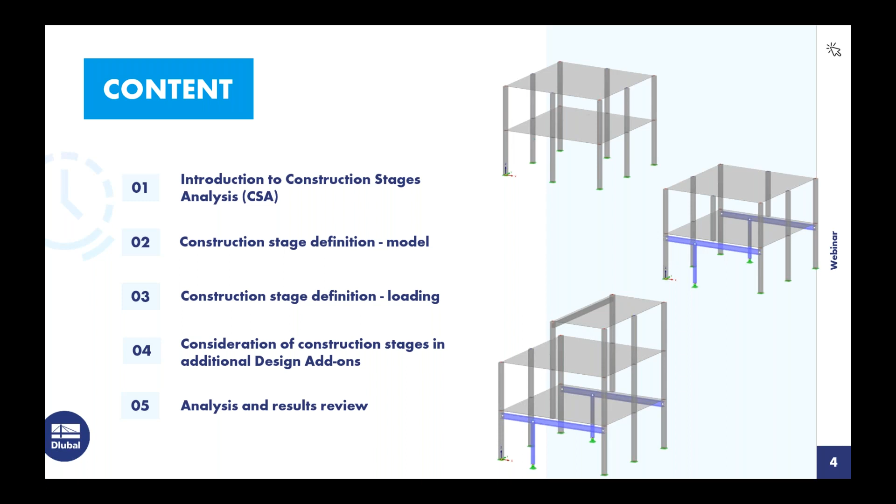So we might be wondering, why would we want to consider stage construction? Well, we know during the construction process that the structure may actually pass through several loading conditions that vary from the completed structure. So for example, when we're talking about multi-level story buildings and adding each additional level on top of each other, the previous level is already undergoing deflections and stresses.

For example, if we look at the building over on the right-hand side, we set up our formwork for the first level, we let the concrete cure, we remove the formwork and we move on to the second level. That first level is already undergoing some of these deflection stresses from self-weight alone, or maybe some of those additional construction loads. So we'd like to take those into account with stage construction.

Now, regular simple structures may see very little difference when we compare the stage construction to simply applying the loads to the finished structure. However, when we're talking about multi-story buildings or structures with vertical irregularities, such as interrupted columns or walls, we might actually see a significant result difference between the finished structure versus taking into account each continuous stage. The construction stage analysis add-on within RFEM allows us to compare similar structures under different modeling or loading scenarios in a single file.

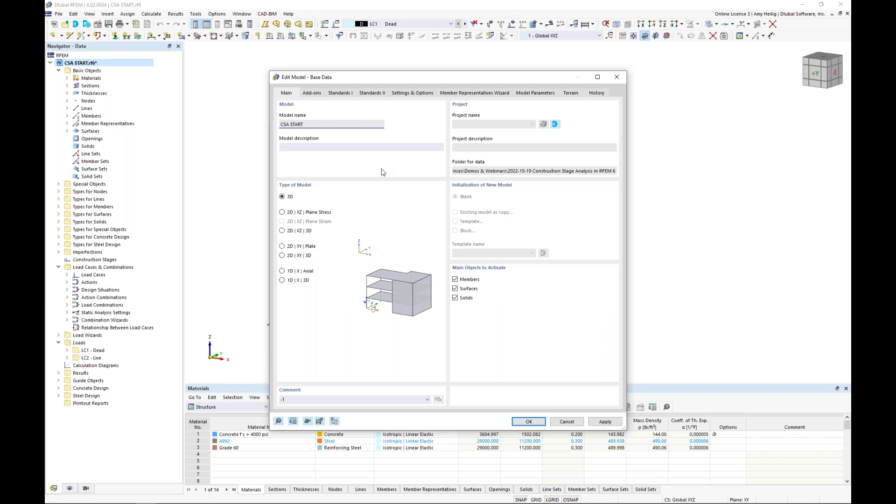Under the second tab, this is where we have all of these optional add-ons, which allow you to purchase add-ons specific to your materials and design for your particular projects. For today, we're working with the construction stages analysis add-on, along with the concrete and steel design add-ons shown here on the right.

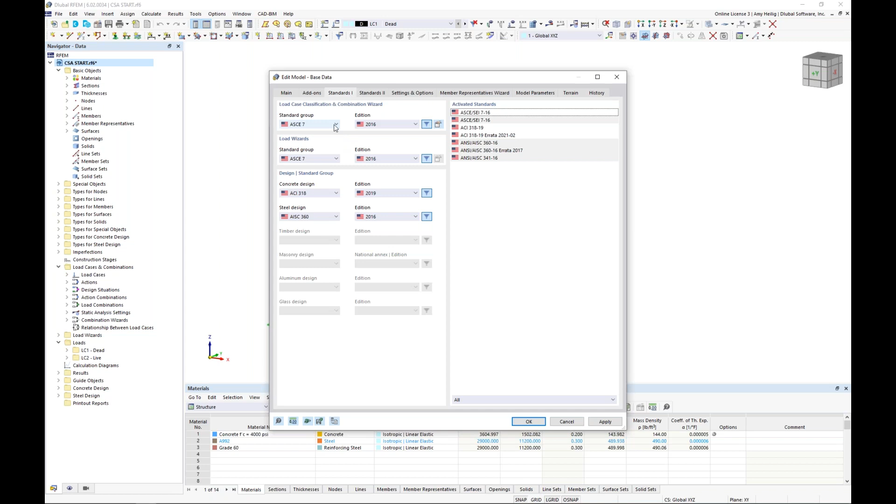Under the third tab, this is where we set our standards. We want to generate the load combinations according to ASCE 7, available in this dropdown. We also see the NBC standard, Eurocode, and many other international standards. For concrete design we'll use ACI 318, and for steel design the AISC 360. Using this dropdown, we can also see the CSA standards and other international standards available.

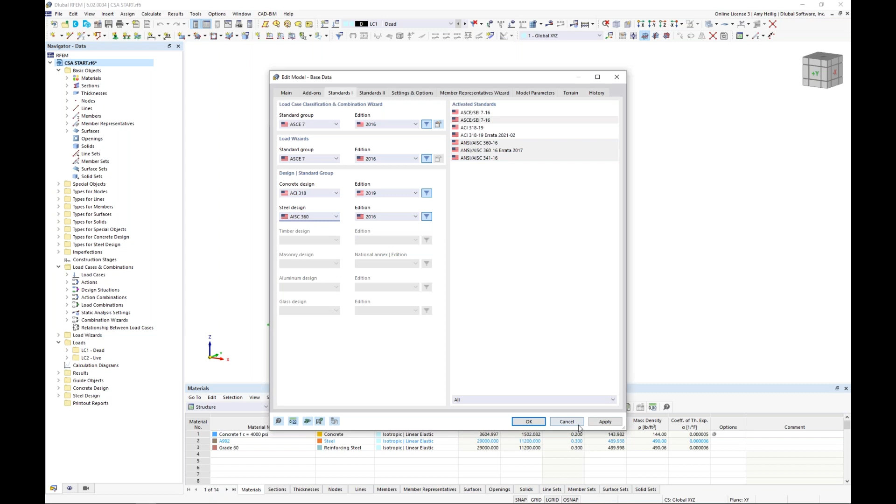Once we've verified this information under the base data, we'll go back to review some elements that have already been modeled. Looking at the navigator, we see that all of our elements are utilizing 4,000 PSI concrete.

Looking at our cross section, all of my columns, if I double click on one of them, are utilizing an 11-inch by 11-inch square section. Under the second tab, the concrete material here is set to 4,000 PSI.

Back under the main tab, notice that design properties is checked on. This simply means we not only want to use this member for analysis within RFEM, but also do the design using the concrete design add-on we turned on within our base data. This gives us all the available tabs to define our reinforcement, which will be used later in the strength and serviceability design.

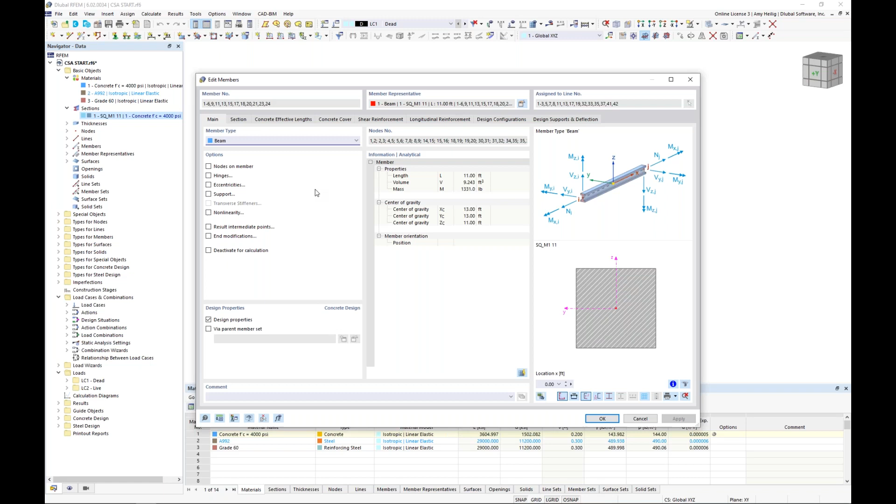I'm not going to go into too much detail today—there's an additional webinar devoted entirely to concrete design according to the ACI available on our website and YouTube channel. Just to quickly cover this, we'll see here that we can specify the concrete cover.

For the shear reinforcement, I have defined number 3s here at 12 inches on center. And I also have my longitudinal reinforcement, which is 12 number 6s spaced evenly around our cross section.

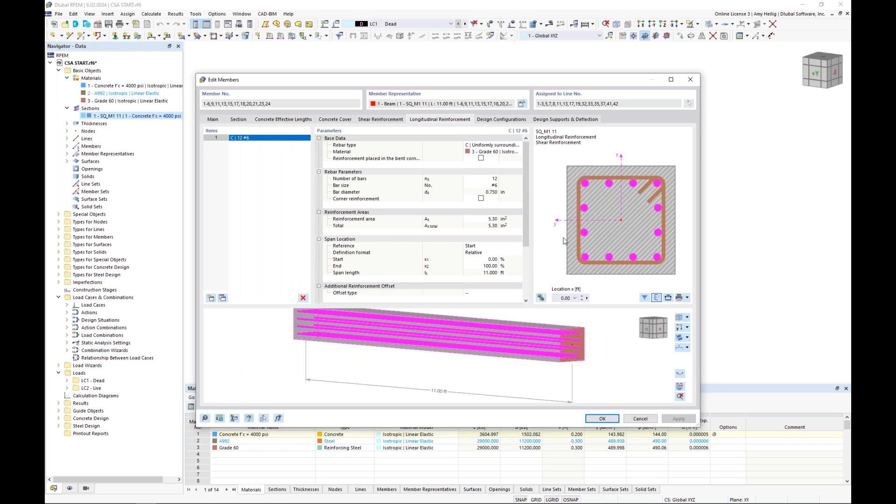This is a very similar workflow for my surfaces as well. Each of these surfaces was defined with a thickness of 12 inches. If I double click on one of these surfaces, we see that thickness defined here, 12 inches, with the 4,000 PSI concrete.

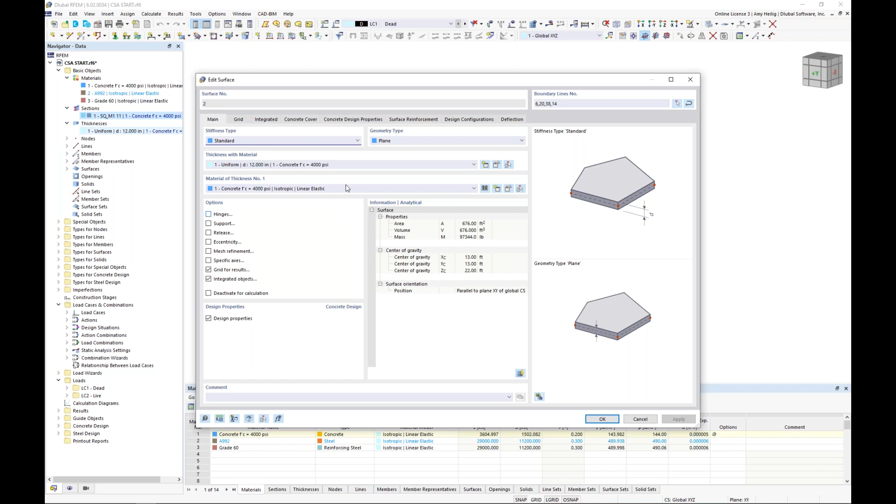Again, I've activated this design property, so we're not only using it for the analysis, but we also want to define our reinforcement for this slab to do the design later on within the concrete design add-on. We see the concrete cover defined, as well as the surface reinforcement.

Looking at this surface reinforcement, we can go into the details here. I've specified simply number 6s at 6 inches on center in both directions for both the top and the bottom—a very simple application for this concrete slab.

But I also have all of these additional free rectangular reinforcements defined. This allows me to place some additional reinforcement—number 6s again at 6 inches—where these concrete columns are framing into this slab. So rather than applying to the entire surface, we apply to what we call this free rectangular location.

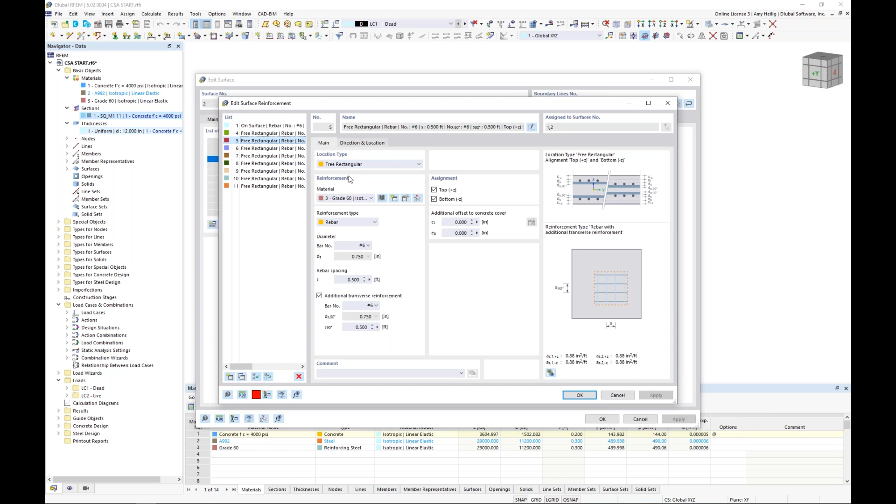Once we've defined all of our reinforcement, what's actually turned on by default—if we go to our Views tab within our navigator, under the Types for Concrete Design—and maybe switch this into wireframe view, we can actually see the reinforcement displayed graphically.

We see our shear and longitudinal reinforcement for our concrete columns. And for those slab elements, we have our number 6s at 6 inches on center, but we also have some additional reinforcement where those columns are framing into the slab.

So we can always turn off this display just to get a little bit of a cleaner look here.

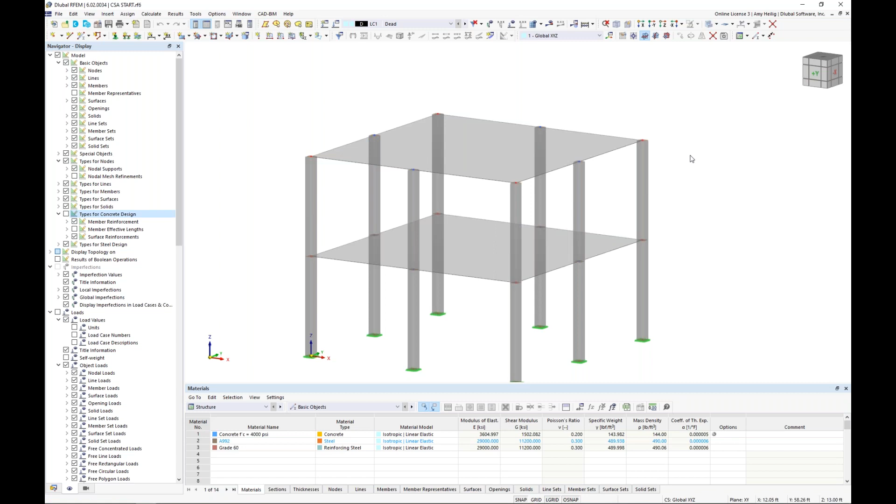Additionally, what else I have hidden, which I'll turn on now, is the mesh refinements. I've added these FE mesh refinements, visible by these symbols at the tops of each of the columns. Within the program, we're likely going to get what we call singularities, where these single line member elements frame into the slab elements at a single FE mesh point.

So I'd like to refine the FE mesh here, which you can see I've gone ahead and done with a nodal mesh refinement.

Additionally, what I have defined, which we'll find under the result objects, is what we call surface result adjustments. Now we can see all of those displayed at the tops of our columns. If I double click on one of these, we have the ability to average out the internal forces over a set area, which helps smooth out those singularity areas.

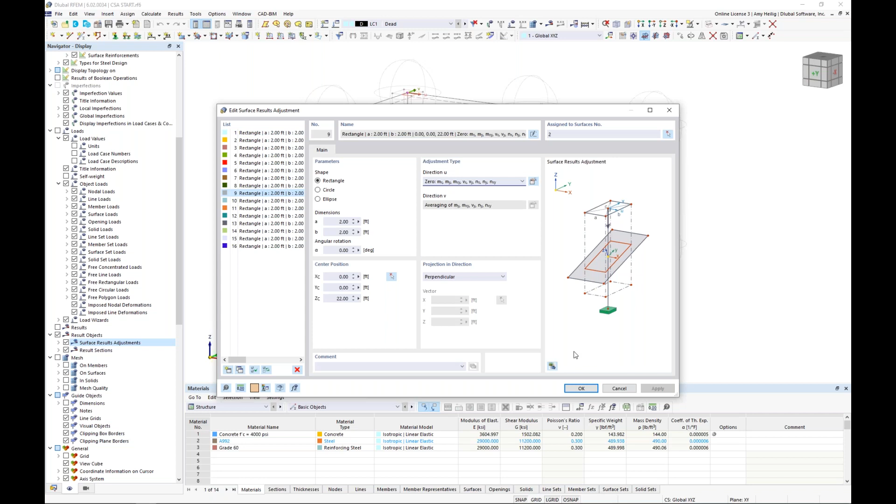For my simple example today, I actually just zeroed out those internal forces at those locations. They're not really a concern for our simple example, so I set that as the definition type here for these surface result adjustments. Again, all of this is just to help with those singularity issues.

So we'll go ahead and turn those off. These will come into play a little bit later on, but for now we will turn this back into the rendered view. So this is my starting structure, just simple two-level concrete elements.

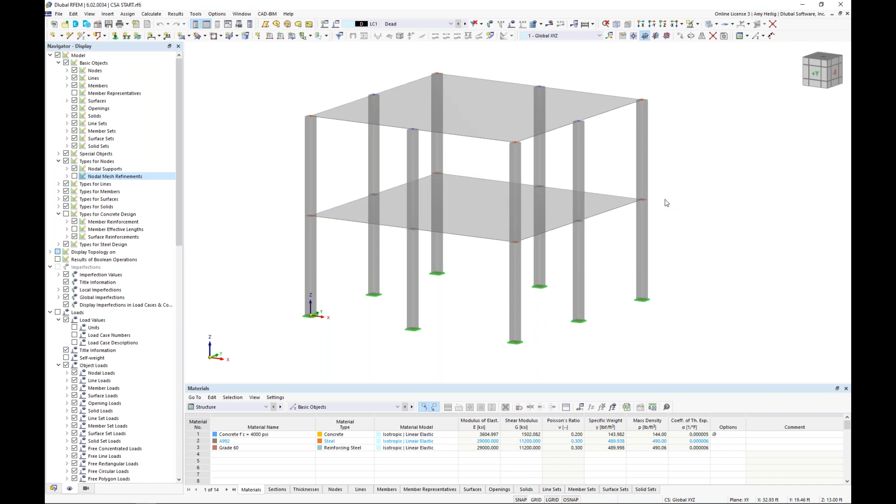Ultimately what I'd like to do is remove these center two columns here on the first floor. Instead of these center two columns of the existing structure, I'm going to add in some steel beams that span between these exterior columns underneath the slab, as well as an additional couple of steel columns that are slightly offset from the center of the structure.

So we're going to deactivate these columns and instead add in some steel members, which will just describe the workflow here of our staged analysis. Before we define any of these construction stages, we need to ensure that we have everything completely modeled in RFEM. So we will begin by drawing a new member here, and up in my quick toolbar, I can draw a new single member.

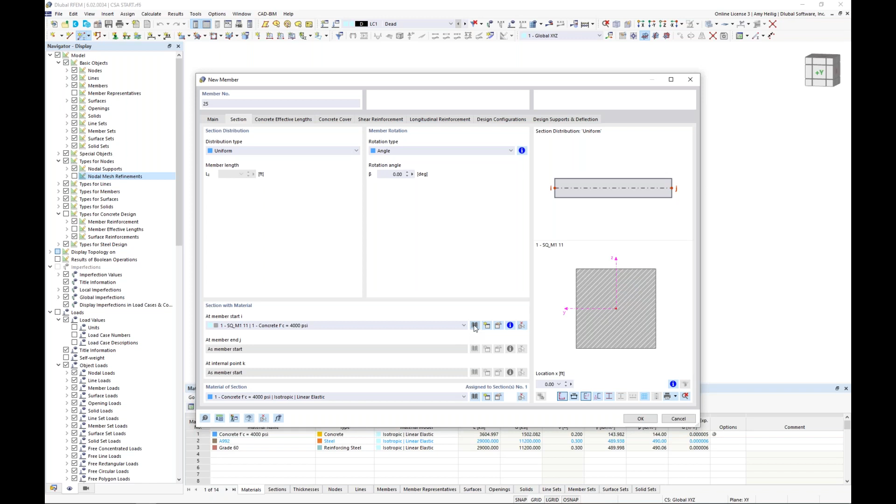Now, under the section tab, I want to define a new cross-section by visiting my cross-section library, and we can see all of the various sections available to us, including the parametric sections, where we just simply input the dimensions and the cross-section properties are calculated automatically.

Alternatively, we can view these standardized sections. For example, we can activate our I-beams. We can use our filters on the left to filter to the United States and to the AISC 15, and I want my beam section to be a W14 by 82. So I scroll down here to my list, and I select the 14 by 82.

Of course we don't want this to be a concrete material, so what we'd want to do is activate our material library for this particular section. Once we launch the material library, we can use our filters on the left to filter to the material type steel, then set the standard to AISC 360, and we'll see here steel A992.

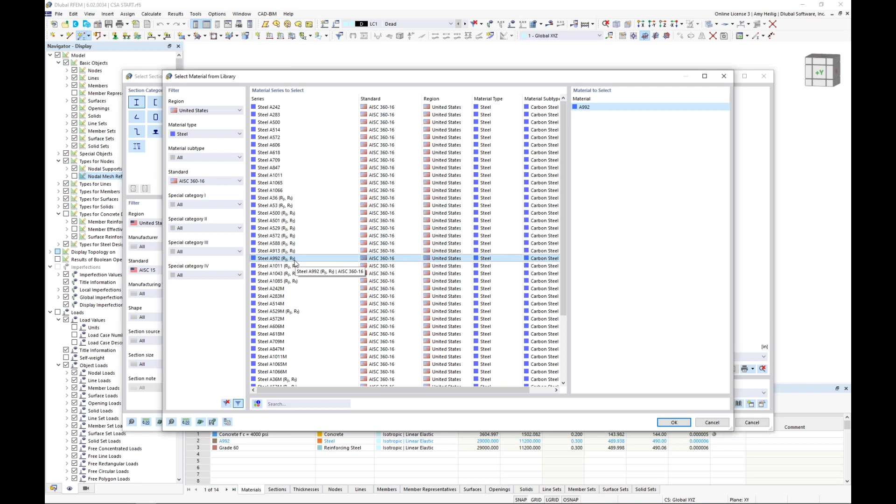Now for me, I already have this steel material defined within this model, so rather than redefining a new material every time, I can just select it here within my dropdown. I select material number 2, A992, and our beam has now been defined here with the correct cross-section as well as the material properties.

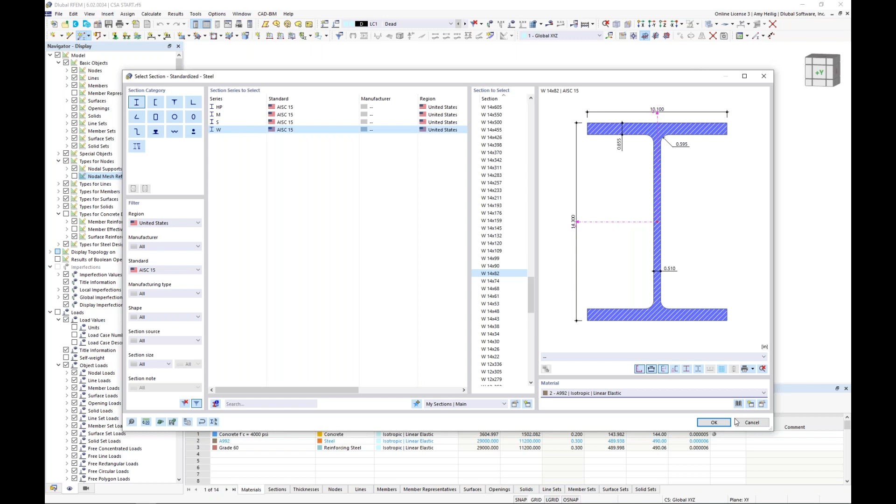In addition to defining the cross-section and material, notice that the design properties is turned on here as well, but we're no longer referencing the concrete design add-on that we activated under the base data—we're now referencing the steel design add-on. Before I draw these members, I also want to activate here a couple other options, including hinges and eccentricities.

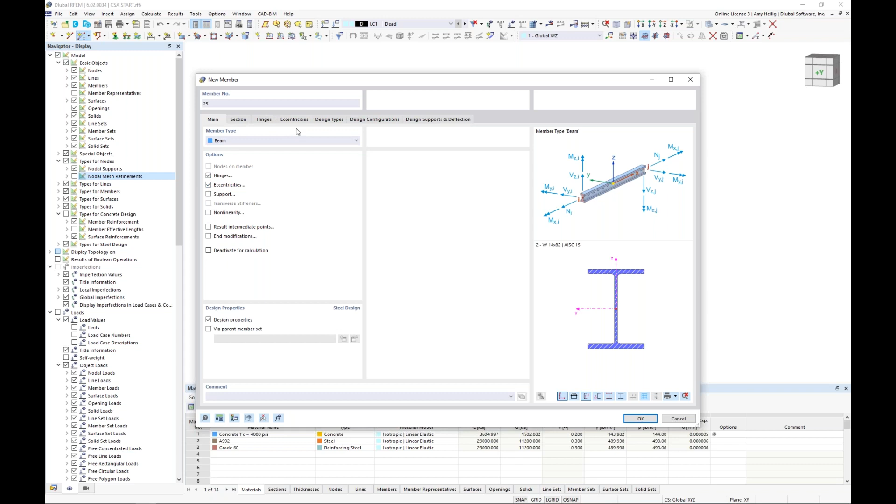Notice we have two additional tabs here up at the top. Remember that everything within RFEM is considered fully fixed, so if we want to release a moment, for example at the ends of the member, we need to define a new member hinge. We do so by activating the hinges.

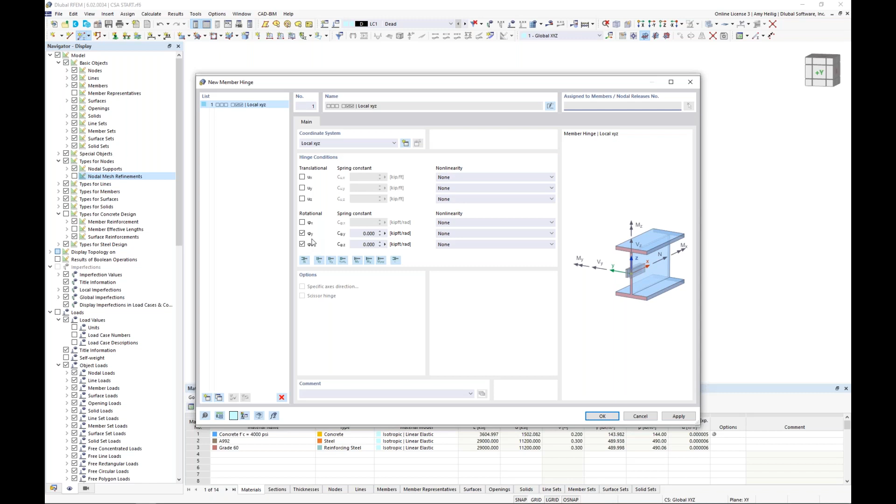We create this new definition type, and the program automatically assumes that I'd like to release the moments based on the local Y and local Z axes of the member. So this is a member end moment release. I click OK, and I've applied that to the member start. Rather than redefining for the member end, I can simply select it here from my dropdown. So we'll go ahead and release the moment at either end of this particular section.

Now the eccentricities is a very similar workflow. We want to define a new member eccentricity here, and I'm going to use this option within my dropdown relative to section.

I will tell the program to take the topmost point of my cross section, and I actually want to offset it from an additional object that already exists within my model. I'm going to select here the option surface, and then I can graphically select surface number 1.

I want to drop this beam member down below the bottommost point here of this surface. So the whole advantage of using this option relative to section is that if I make any changes to my cross section size, or any changes to the thickness of my surface, this eccentricity will automatically update. I don't have to come back in here and adjust it manually.

So we applied that eccentricity definition to the member start. We also want to apply it to the member end.

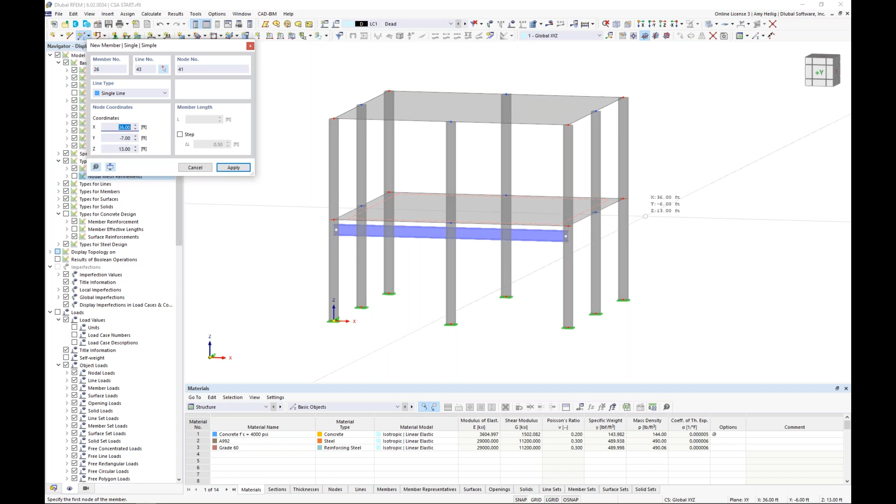Now that we have defined the hinges and eccentricities, I click OK, and then I will snap from the right-hand column to the left-hand column at the front of the structure, and also do the same at the back of the structure. So now we can see this steel beam drop down below the surface.

Obviously, it's intersecting these concrete columns, but that's completely fine. We'll make these changes later on with the construction stages so that both of these do not exist together.

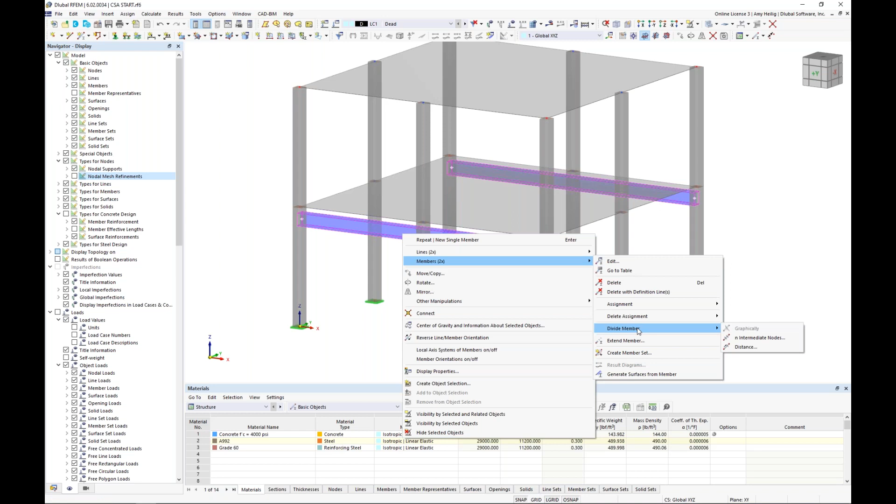I'm going to hold down my control key and select both of these members. I want to right click here, and under the member option, I'm going to divide the member by a set distance. So here is where I want to add a node along the member 8 feet from the member end.

But instead of actually dividing the member, I'm going to turn on this checkbox here to create the node along the length of the member without dividing it.

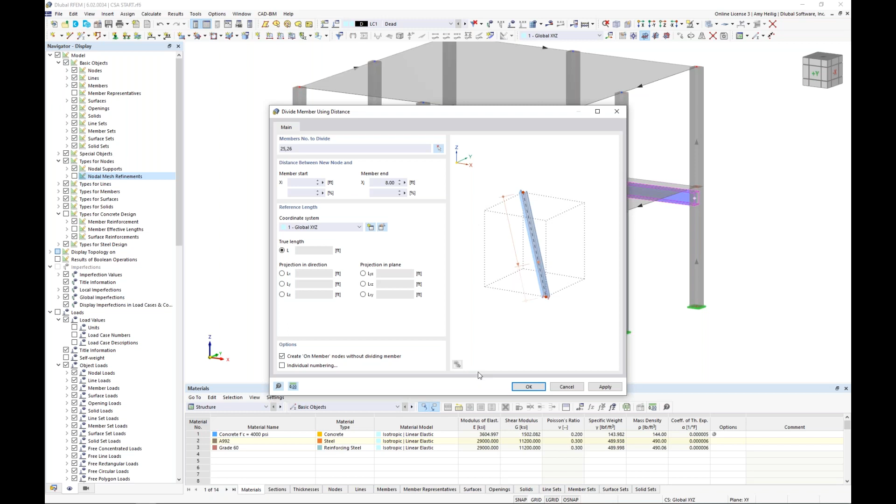So when I click OK and we turn this into wireframe view, you'll see that this is still one continuous member, but we now have a couple of nodes here defined along the member length.

And these nodes are special in the sense that they're of the type on member, and the program automatically detects which member it should be integrated with.

So what this allows me to do now is to draw in my steel columns that will frame into these steel beams. So I'll begin here by just adjusting my drawing work grid, and we can turn this on at the bottom of the page here, and we will also adjust the plane.

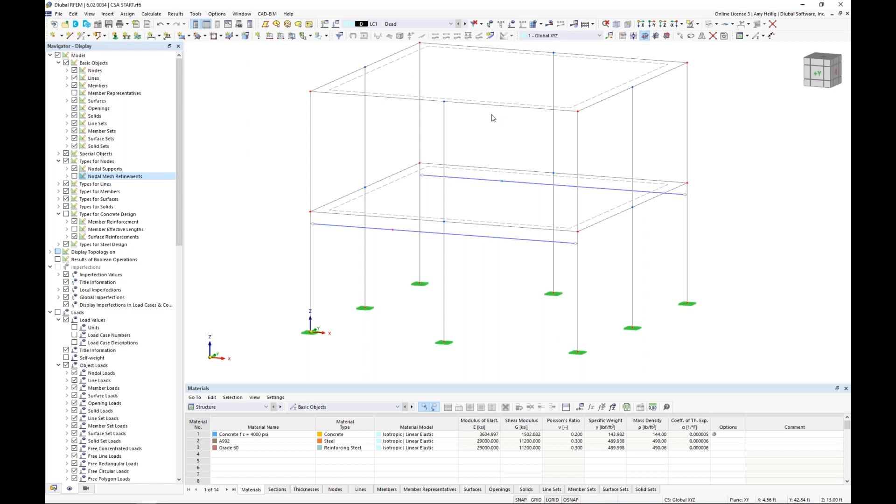And I will create a new cross section yet again. So the member type is set to beam.

The section here will be defined once again from my section library. In these standardized sections, I want to select here a W8 by 35. Remember, I already have my A992 material defined within the model, so I can select that here.

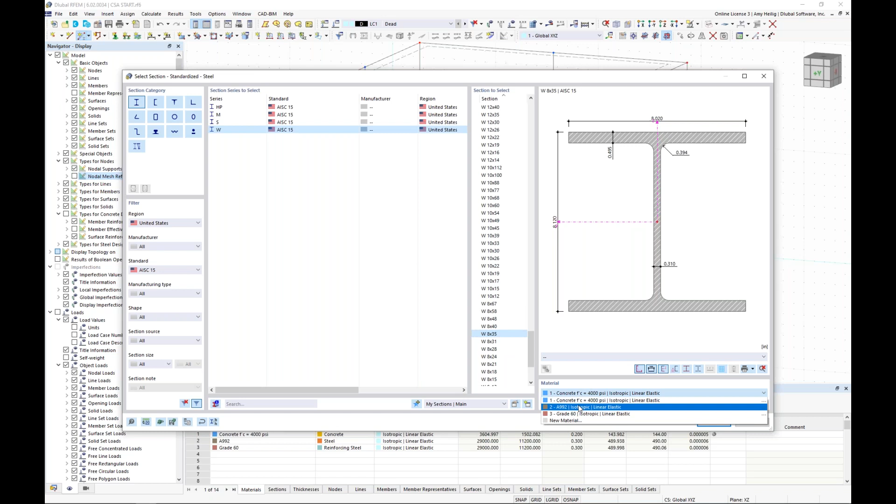I click OK. And the one thing that we'd like to add here is also a hinge definition. So under my hinge tabs, remember I have already defined that moment release, so I can select it here from my dropdown as well, where I can release the moment at the member end.

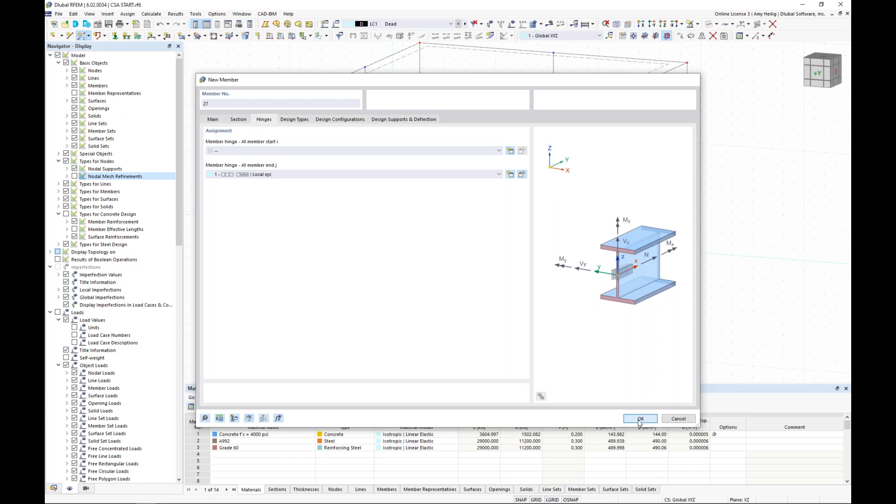I click OK, and then I'm going to snap from the bottom of the structure up to that node that was created. I can right click to exit this dialog box.

If we take this element, we can highlight it, hold down our control key, and we can drag and drop to the rear of the structure to create that additional column.

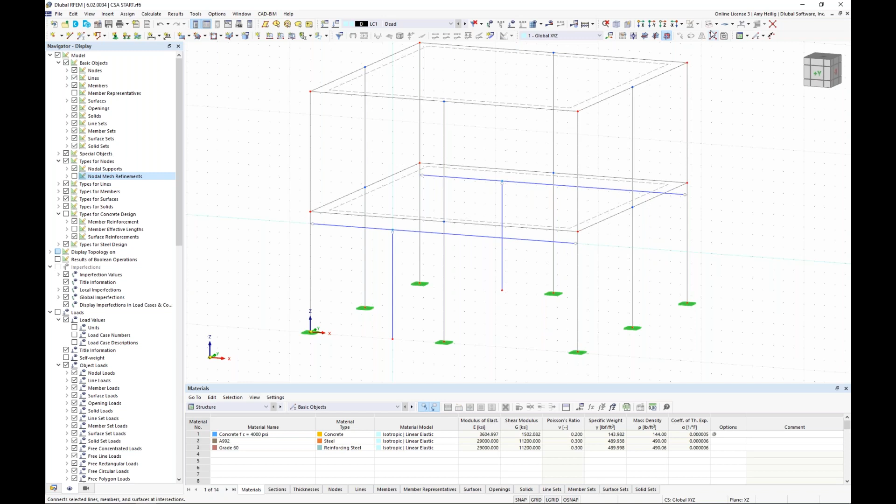So now that these two columns have been generated, there's a few additional things that we want to take into consideration. Number one is we obviously need to add some supports to the bottom here.

So we'll go ahead and add in a new nodal support. We're just going to use one of the default definition types here, hinged. I can click at the bottom of these steel columns to add in that nodal support.

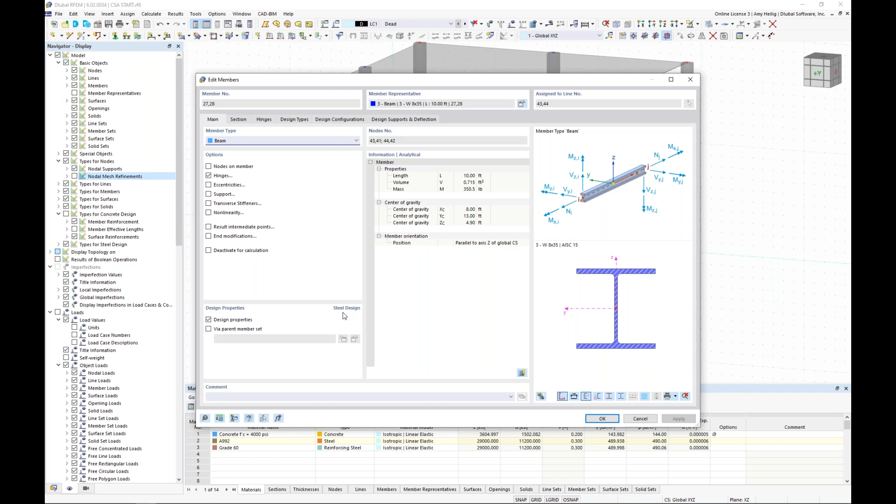The second topic is holding down my control key to select both of these columns. Remember, we are going to design these members utilizing the Steel Design add-on at the end of this example. But one thing that is required if we want to do so is we do need to define information like the unbraced lengths. We do so here under the design types effective lengths.

Now, again, I have an additional webinar devoted entirely to steel design according to the AISC that goes into much more detail to talk about the unbraced lengths or effective lengths definition type here.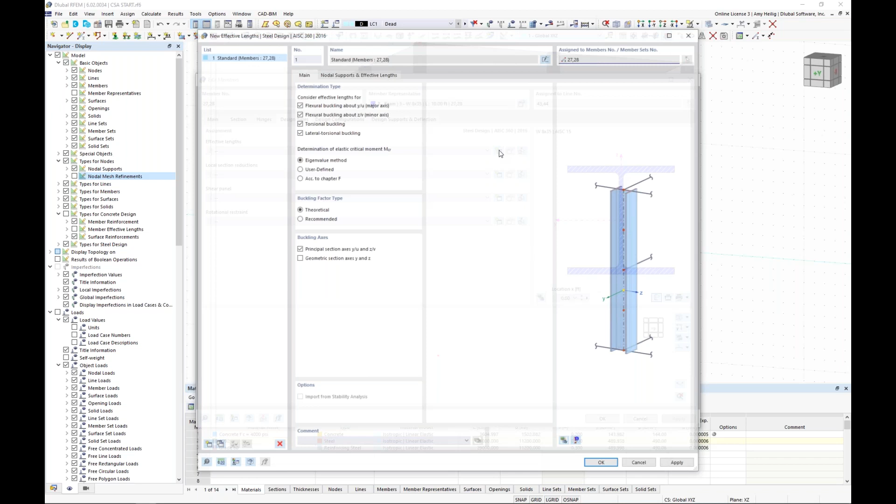So we'll just quickly add in these intermediate supports that are going to be applied here for flexural buckling, torsional buckling, and lateral torsional buckling. Under this second tab, the default option is to add in this intermediate support at the member start and member end.

And now my unbraced lengths for my stability design will default to the full member length. So when I click OK, we go back into the model and the unbraced lengths have now been defined here for these particular elements.

Now we need to do the exact same thing for our beam elements. We'll select both of these elements, and under the design types, we define a new effective length. But this time I want the program to detect these intermediate nodes, in particular where this steel column frames up into this steel beam, where I can add an intermediate support in the vertical direction. So now the program will consider this with the effective lengths, or unbraced lengths, for our stability design.

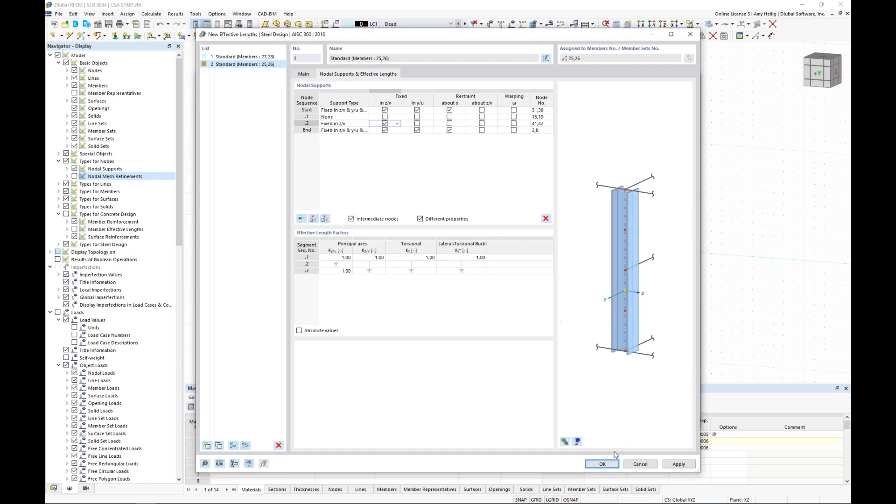Okay, so that takes care of the unbraced lengths, which will again come into play a little bit later on for our actual steel design according to the AISC.

The final topic here related to this first story is that currently this slab element is entirely connected to this steel beam, so full moment transmission between these two elements.

Now, if we'd like to release some of those degrees of freedom, we can consider what we call a new line hinge. Under the option types for lines, we expand this folder and see a line hinge, where we can right click to create a new definition type.

With this line hinge, I'm going to release all degrees of freedom: three in translation based on the local X, Y, and Z axes, and one in rotation. Keep in mind these are based on the local axes of the line element itself, not the local axes of the surface or the member. Each line has its own X, Y, and Z axes.

But rather than keeping these fully released, we want to add a nonlinearity. This nonlinearity will allow the slab to bear down on the beam when we have downward deflection. So if we have a negative shear value in the local Z direction, we should see full fixity, but if we have uplift, then that relationship between the slab and the beam will be released. So we're applying this nonlinear behavior to the line hinge.

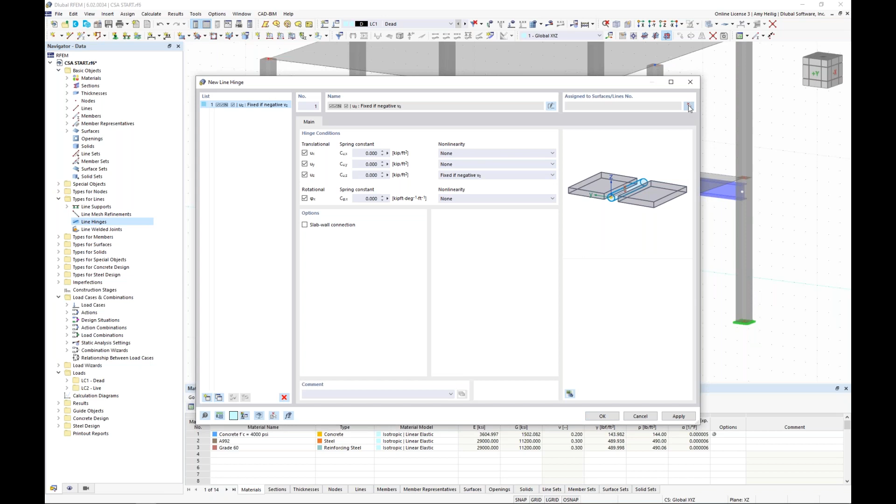Once we have the definition type presented here, we want to apply it to the model. We do so by first selecting the surface we want to apply the line hinge to, then selecting the lines, where we select the front line number 12 concurrently with the back line number 18. We click OK, click OK, zoom in, and we see a very small symbol for that line hinge definition.

Again, this will also come into play with our construction stages. So we're now complete with this first story.

The final thing I want to do with this model is add in a third story, a partial third story. Before we do that, I'm going to go back to the nodal mesh refinements and turn back on my concrete reinforcement and also those surface result adjustments. I'm doing so because when they're graphically displayed, this will ensure that when I copy all of these elements to the third story, all of these details are also copied.

So we can go ahead and highlight this top story, including the reinforcements, mesh refinements, and so on. Normally we could use this simple drag and drop copy that I showed you with my steel columns, but I want to take advantage here of the Move Copy tool for a specific reason.

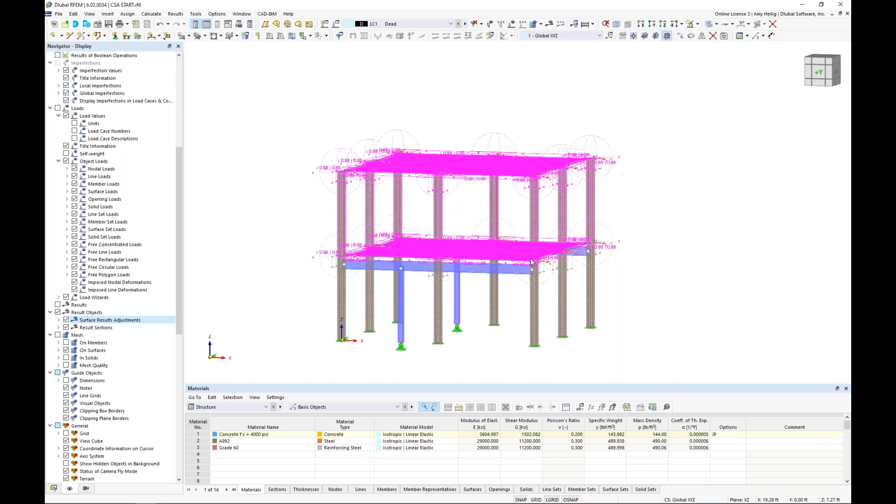So we're going to create a copy of that second story, and I can either type in my displacement vector or use this measurement tool. I can snap to the bottom of that second story up to the top, and we see the program automatically detects this is 11 feet in the Z direction. Under the numbering and options, I have the ability to not only copy all of the elements, but also the loading. I have some existing loading on the structure for dead load and live load, which we'll visit in just a few minutes.

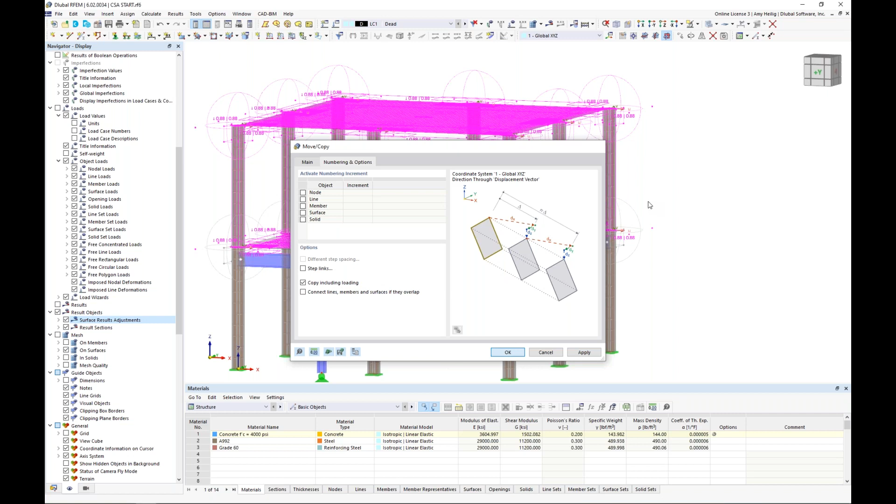By activating this checkbox, all of those loads will also be copied. So I click OK, and what we should see here is the addition of this third story.

Now for this third story, I actually want it to only be a partial third story. So we'll need to clean this up slightly. I can do so by holding down my control key to select the tops of these nodes of these columns. I hit delete on my keyboard, and now all of those columns are gone.

I'm also going to hold down my control key to select my columns as well as the nodal point here at the tops of the columns. I'm going to use my Move Copy tool again, but instead of creating a copy, we'll uncheck this. I want to use my displacement vector.

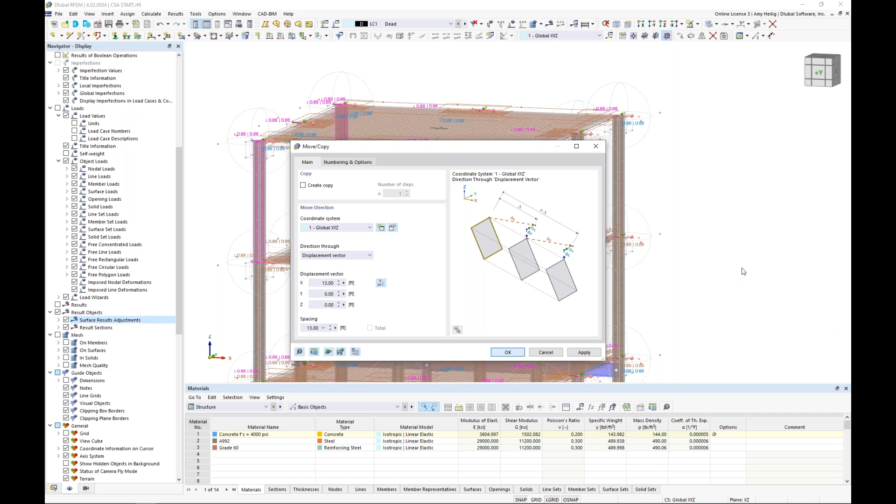I will select from the left-hand side of the structure because I want to move those columns to the center of the structure. So, a displacement vector of 13 feet. When I click OK, what we should see is that partial third story.

Notice that all of my reinforcement was copied as well, and it's somewhat adjusted since I essentially shrunk down this third story to a partial third story rather than the entire area. Back under my navigator, we can see the types for concrete design and all of my surface reinforcement listed. So the program was intelligent enough to apply the same reinforcement to that third story.

We see our number 6 bar is at 6 inches on center. We also see our free rectangular reinforcement that was defined for that third story. So we can make modifications if we're not needing such close spacing, or if we want to change our bar diameter, we can do so. But for this example, I'll leave everything as we see here.

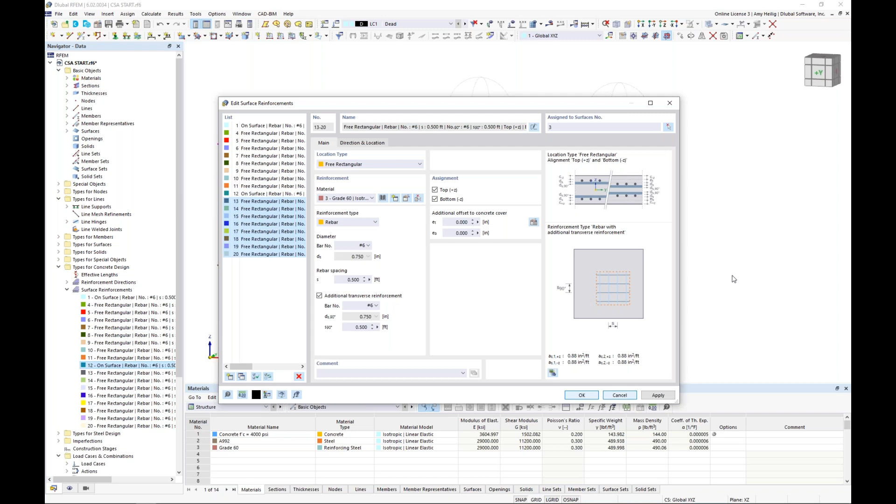So all of this information over here that exists, we can simply highlight it and hit delete on our keyboard. Essentially the modeling is now complete for this structure.

Again, before we define those construction stages, we need to ensure everything is fully modeled within RFEM itself. So I want to turn off the nodal mesh refinements. I'll turn off my reinforcement and those surface result adjustments just for a cleaner look. Now we're finally ready to begin with our construction stage definition.

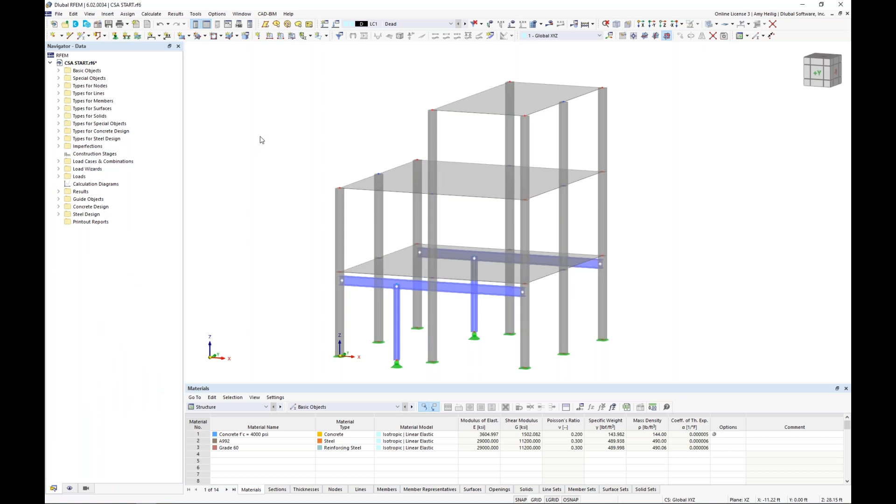Back in my navigator, we have a nice feature here. If I right click, I can collapse all of these folders. Actually, there's one more thing I wanted to do before we define our construction stages: maybe we wanted to apply a quick rib element that spans between these columns.

Just to introduce you to this rib type, we can draw in a new single member, and we can see here the member type would actually be set to rib. Now, what's special about a rib is we can integrate it with the slab, so those internal forces will now include the internal forces from the slab for some effective width that we define.

We also can turn on the design properties to design this as a T-beam, including the reinforcement in the concrete design add-on. For today, I'm not so interested in designing it, so I can simply turn this off. I only want to consider it for the analysis. Notice all my tabs here to define my reinforcement are now gone.

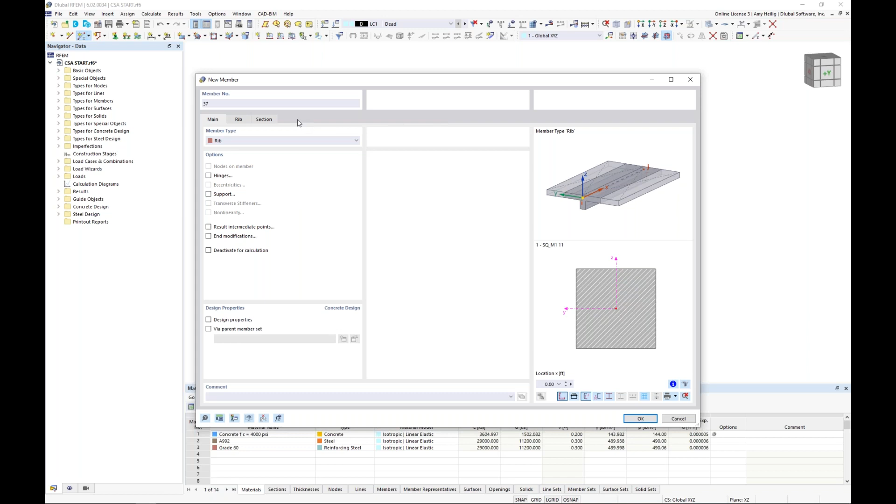So under the section, we will create a new cross-section type for the last time, and we'll choose this massive rectangular section, where I can quickly choose under the second tab my dimensions, and I will type in directly 8 by 12 inches for this rib element.

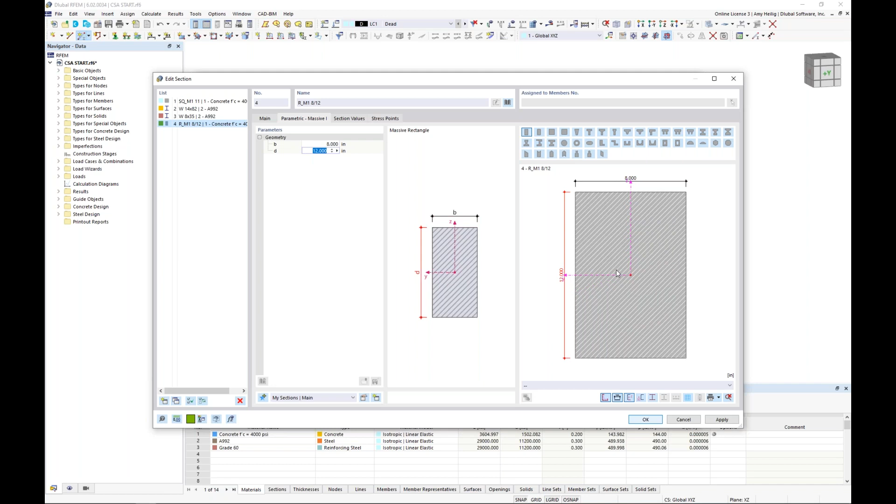4,000 PSI concrete is already defined, and under this second tab, we want to drop this down below the negative Z direction of the surface element itself. So when we click OK, we can draw in this rib element from right to left. Again, internally we are including the effective width of this element. If we revisit the rib section, we can actually see that drawn here graphically.

Okay, so now we are done with all of the modeling within the RFEM program here, so we can move on to the construction stages. We've collapsed all of these folders just to make this a little more visible. You'll see here the construction stages option. Now this is only available because we activated that construction stages analysis add-on under our base data.

We will start by right-clicking to create a new construction stage. You can see the program defaults to construction stage number 1, and gives it the name of Start. We can override that name if we'd like, but we need to tell the program which elements are active for this first stage.

We'll begin with our members, our surfaces, as well as our nodal supports, and get additional tabs up here. I did want to point out this option that's grayed out for time-dependent analysis. This is still in development. Eventually we will link the construction stages analysis to our additional add-on for time-dependent analysis to take into consideration topics like creep and shrinkage, but for now this is still in development.

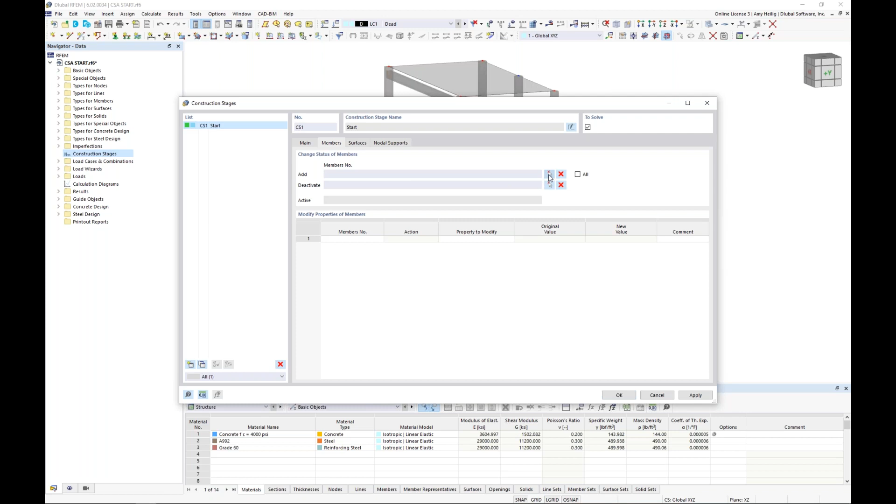Under these additional tabs, we want to add in the initial elements for that first stage, and we begin with our concrete columns. At this first level, I'm going to select all of my concrete columns, making sure I'm not selecting any of these steel elements yet. For my second floor, I select all of my concrete columns here as well. I click OK. For my surfaces, I want to activate surface number 1 and surface number 2, and I click OK. Finally, for my nodal supports, I want to activate the nodal supports at the base of these concrete columns. Again, I am not selecting the nodal supports of my steel elements, and I click OK. So my first stage definition is complete.

I'd like to create my second stage definition, and I can do so within the lower left corner, number 2. You can see here that I again have the ability to override the name, so if I'd like to rename this one, we can call this one Add Steel Members. I want to activate my members.

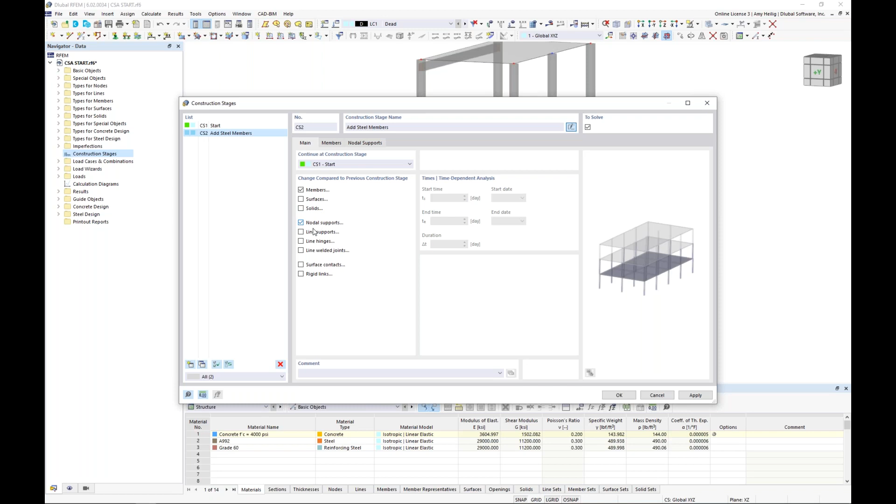I'm not actually making any changes to my surfaces, so we can leave this active, but for simplicity we can also turn it off since we're making no changes. We can go ahead and select the nodal supports, and remember we also added in those nonlinear line hinges, so we want to activate this here as well.

Now under the members, this is where we want to deactivate those center concrete columns. I select here graphically members number 9 and 13. At the same time, I'm going to activate all of my steel members, so I can graphically select all 4 of these steel members. This entire process is going to be completed here within this second construction stage.

By all means, we could have certainly separated out these options into two stages. Perhaps we'd like to deactivate our concrete columns first in one stage and then an additional stage to add in the steel beams. It all just depends on how your construction stage workflow is for your particular project, but for me, I just define these all in one stage, so that will happen simultaneously.

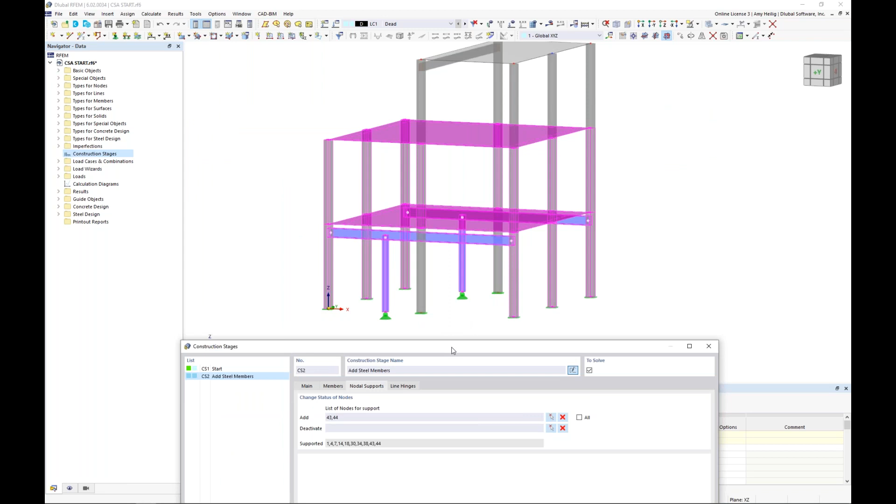Now the nodal supports, we do need to add in the pin nodal supports at the base of the steel columns, so we go ahead and select those. I don't need to worry about deactivating the supports at the bottom of the concrete columns, and in fact the program won't even let me because it says these members no longer exist, so those supports are no longer active either.

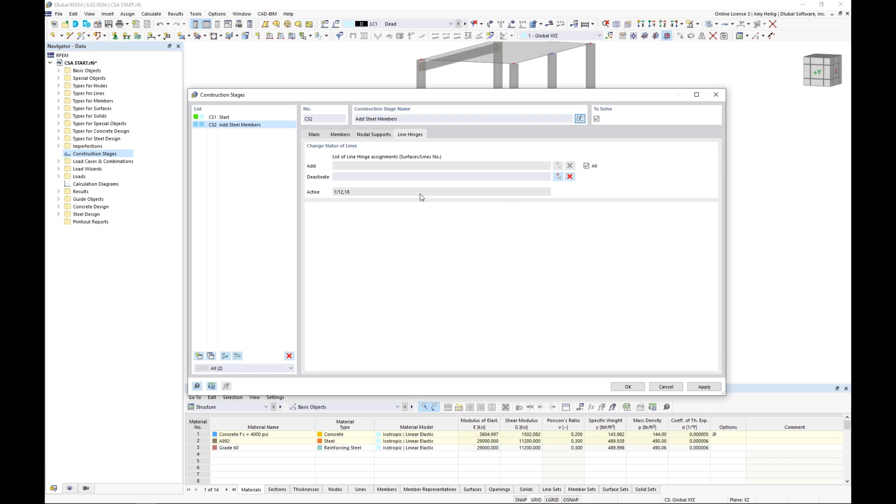Now finally we also have the line hinges, so I can graphically select the line hinges, or alternatively I can just simply hit this all checkbox. We only have one line hinge definition in the entire model, so this option all will go ahead and activate all line hinges here. This will complete our second construction stage.

Now the final stage, which we again go down here to the lower left corner, and we want to rename this one to Add Third Story. The options here to activate, we want to leave on the members. We also want to activate the surfaces, but everything else can be unchecked.

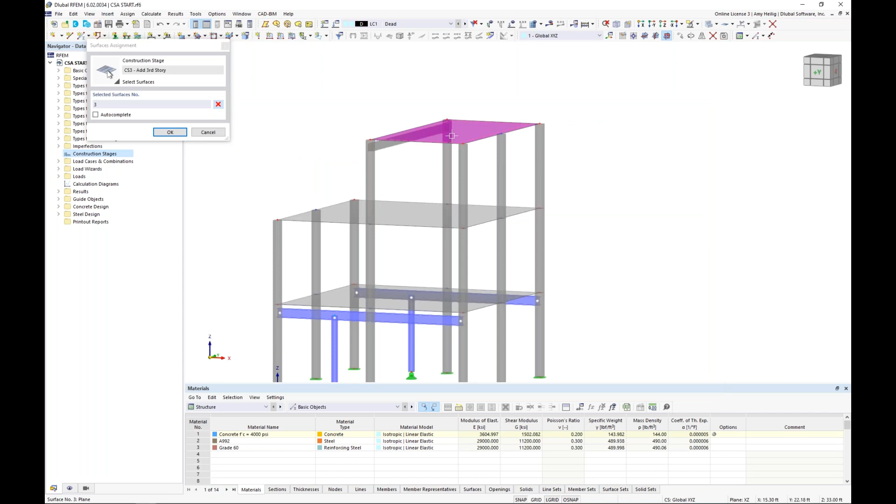For our members, we want to add in all of our concrete columns and even that rib element here at that third story. I click OK, and then my surfaces, I could either type in directly surface number 3, or I can graphically select it here. This will sum up my construction stage definitions.

Once I am done defining all 3 of these stages, I can click OK. What you'll actually see here at our drop-down is each of these construction stages presented to us where we can graphically see what's going on.

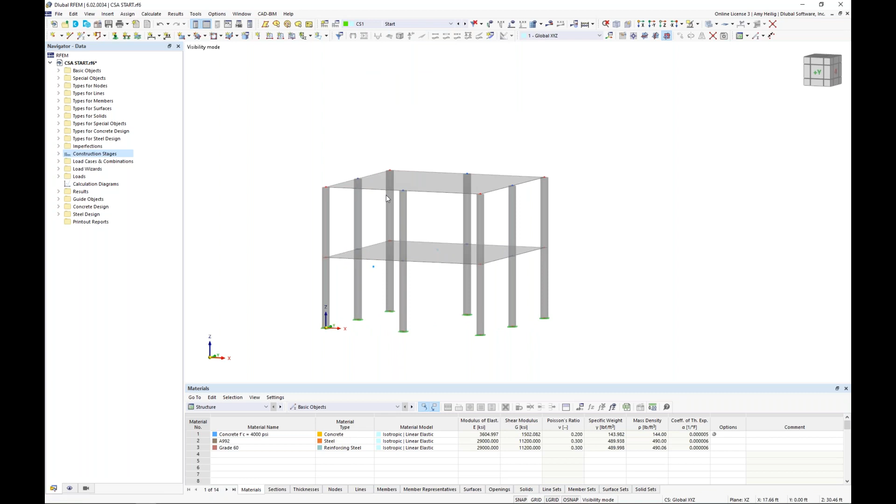So here's stage number 1. Here is stage number 2 — notice those 2 concrete columns are gone, and we've added in our steel elements. And finally, we have the addition of the third story. So this will sum up the construction stage definition from the modeling point of view.

But now we need to move on to the loading. How can we integrate the load cases as well as combinations to these various construction stages?

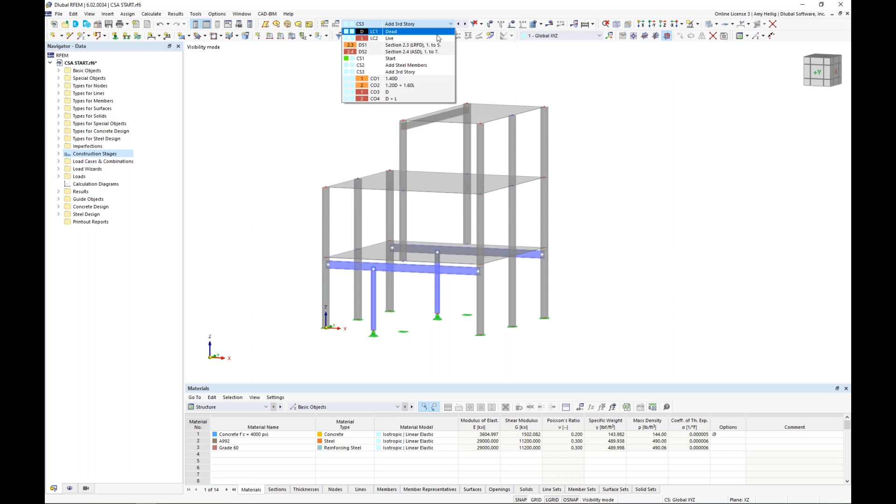I want to point out first that I have already applied 2 very simple load cases to our model today. If I activate my dead load and turn on the display, these are simple surface loads applied to all 3 levels. Remember, when we copied this third level, the loads were also copied. So just a simple 35 pounds per square foot for our dead load. Same concept for our live loads, slightly different magnitude of 40 pounds per square foot applied at each level.

Now, of course, for a project in real life, we'd probably want to add in wind loads, snow loads, whatever else it may be. But for this simple example, we only have these dead and live loads.

So I'm going to access my load cases and combinations dialog box, and we see these 2 load cases listed. Dead load, where self-weight is automatically turned on with the action category set to dead load directly from the ASCE 7. The second load case is live load, again with the action category set to live.

So if we back this up a step, remember under the base data, which we modified at the beginning of this example, I told the program I want to generate my load combinations automatically according to the ASCE 7. Of course, we can make changes here if we wanted to switch to the NBC or any other standard. But when this option is turned on to generate the load combinations automatically using the combination wizard, the program will reference the selected standard to automatically create those load combinations.

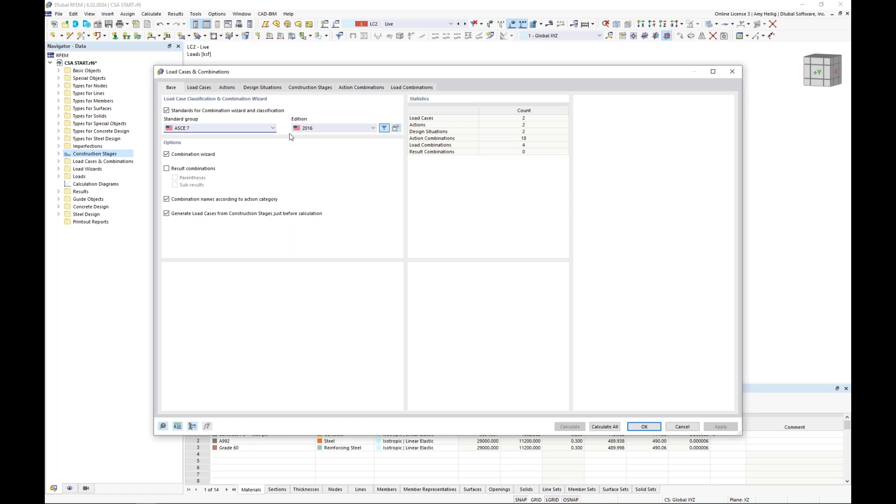So let us take a look at the design situations. The design situations are absolutely needed when we want to do design in the various add-ons. We have activated the concrete design add-on and the steel design add-on, and we'll see a little bit later on why we need these design situations.

The design situations essentially encompass all of our load combinations. We have two of them here: our LRFD design situation from the ASCE 7, which is all of our factored load combinations directly from the standard, and a second design situation for ASD, which is our unfactored load combinations. Again, we can reference here to see exactly what they look like according to the standard.

Now, if we take a look at the load combinations tab, here are my individual load combinations strictly for those dead and live loads, since I don't have any additional load cases defined. I have two factored load combinations that belong to that LRFD design situation, shown here in orange, and two unfactored load combinations that belong to my ASD design situation.

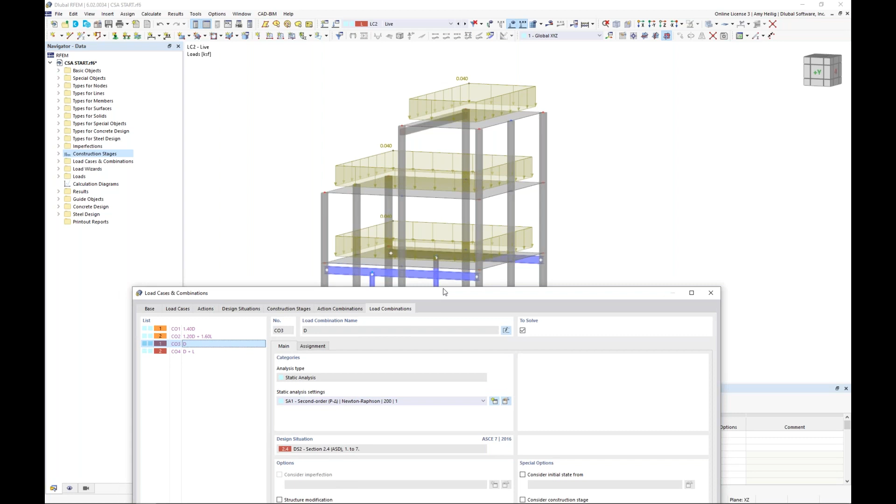Now, if I was applying the conventional method of applying all of these dead loads and live loads to my structure — again on the finished structure with the third story and the steel members — then we would just go ahead and move on with the calculation utilizing these load combinations. But currently, they are not referencing those various construction stages.

So what we want to do here is go to the Construction Stages tab. And here we see our 3 stages that we have already defined, which are automatically brought into this dialog box. Notice that each one of these stages will reference the previous stage — it says continue at construction stage number 1 for number 2, and of course our third stage is referencing number 2.

A couple other options to point out here: the construction stage analysis is done according to the load combinations. This is grayed out because it's also in development — in the future we plan to add the option for load cases and a result combination using linear superposition. This would be for linear structures where we don't necessarily have to incorporate the construction stages into each load combination, but rather we superimpose the results on the finished structure utilizing a result combination instead.

So this could be a really powerful increased performance feature for multi-level story structures. Maybe we have hundreds of load combinations, so this will essentially be very efficient. But for now, it's still in development, so that's why this option is grayed out.

Now, the static analysis setting, this is really important. You can see here that my construction stages right now are set to second order. If I go into the detail settings here, we could change this to first order, second order, or third order. We want to ensure that these static analysis settings are either equal to or higher than what we're using in our load combinations and our design situation. So my design situation is set here also to second order, which means that my load combinations will be run according to second order.

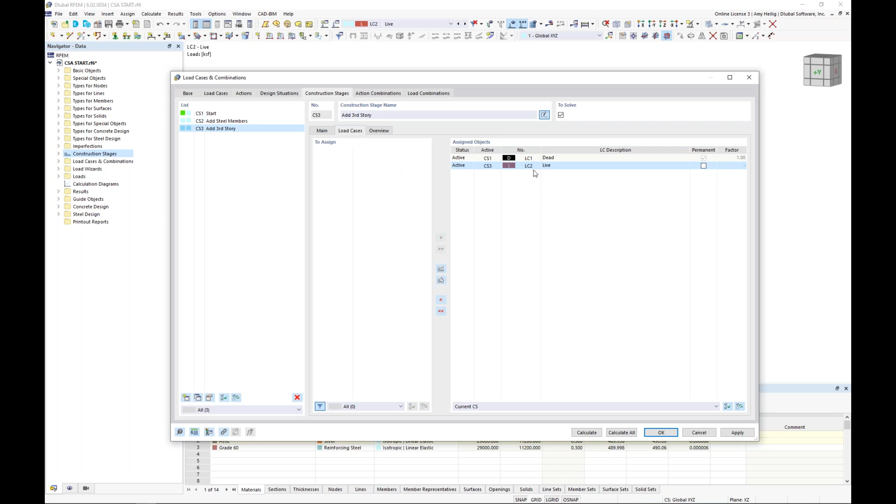And finally, we have our third construction stage where we've added in that third story, and dead load is already automatically included. It has to be because of that permanent checkbox here, but I'm going to factor back in my live load here. So now we have allocated each one of these load cases to the construction stage.

The final thing to do here is to tell the program to create the combinations utilizing the construction stages as well as the combination wizard. So I turn on this checkbox here and go into the detail settings, and I'm going to tell the program don't consider the normal load combinations that we previously saw. Rather, just consider the construction stages only. I'm not concerned with the final structure and applying those loads with the conventional method.

And I click OK. And then we can just simply turn on this checkbox here for the rest of these stages. This checkbox is already turned on if we go into the detail settings because it's part of this combination wizard definition type number 1 here.

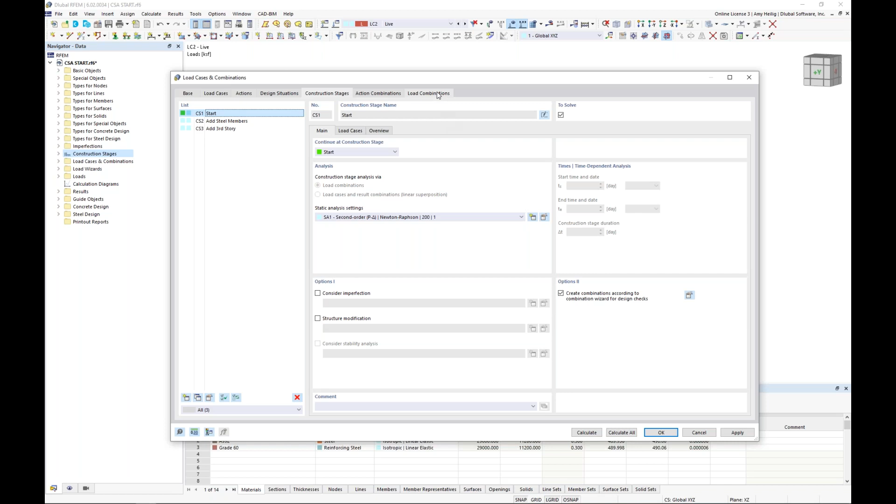So now that we have selected this checkbox, we should see slightly different load combinations shown under this last tab, and sure enough, we do. Notice that we have our factored load combinations, part of that first design situation, but they are now considering the construction stages. So for stage number 1, we have 1.4 dead load. For combination number 2, still construction stage number 1, we are now also considering the live load, so dead load plus the live load. If I look at construction stage number 2, I'm only considering the dead load, so 1.4 dead. Remember, live load I did not incorporate into this particular stage.

Notice on the right-hand side, the program says for the initial state, I'm going to consider the previous construction stage. You can see our load combination number 1, so it will take into consideration those strains and stresses that the structure is already undergoing from construction stage number 1, and apply this to construction stage number 2 for this particular load combination. Same exact concept here for construction stage number 3.

We can see the initial state is set here, but we're also factoring back in our live load, so we see 2 additional load combinations here. Same exact concept for my unfactored load combinations that are part of this second design situation here, my ASD design situation. Now we see a couple of grayed out load cases down here at the bottom, and we might be wondering what those are for.

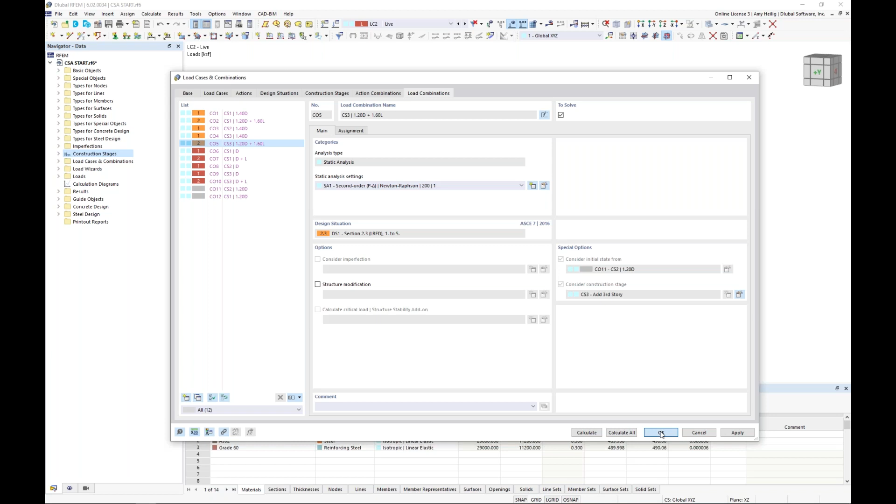Now that we are done defining the load combinations, considering the construction stages, we're finally ready to run an analysis. So before we run the analysis, what's also nice is that in my dropdown, I see all of those load combinations listed here, and I can actually cycle through them.

Here's load combination number 1 with my dead load. Here's dead plus live. Here's my second construction stage, again only with the dead load. And then I move on to the addition of that third story with the dead load consideration, and then dead plus live. So the program's automatically combining all of these together.

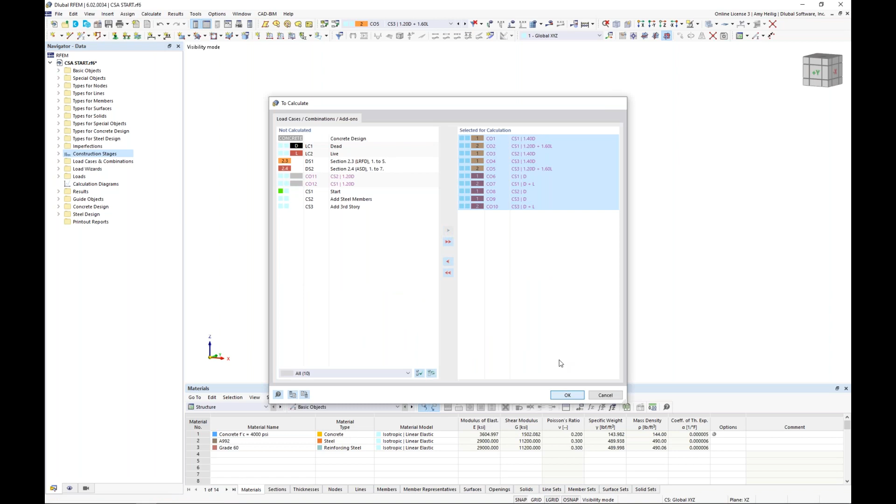Under calculate, we go to the option to calculate, and I'm going to select here only my valid load combinations to move over to the right-hand side. When I click OK, the program is going to generate the FE mesh, and then new within RFEM 6 is this multi-core processor where we can solve load combinations simultaneously for a little bit quicker analysis here.

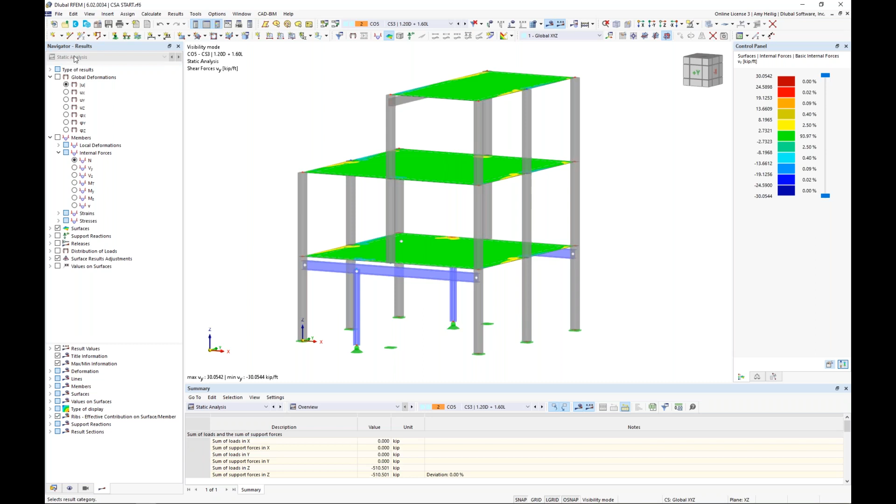Once the program is done solving for all of these load combinations, we're now presented with the static analysis results. So no design yet, just purely the analysis portion within RFEM itself. We can see our results available to us in our navigator over here. For example, we're looking at load combination number 5, and we can view the global deformations of the structure.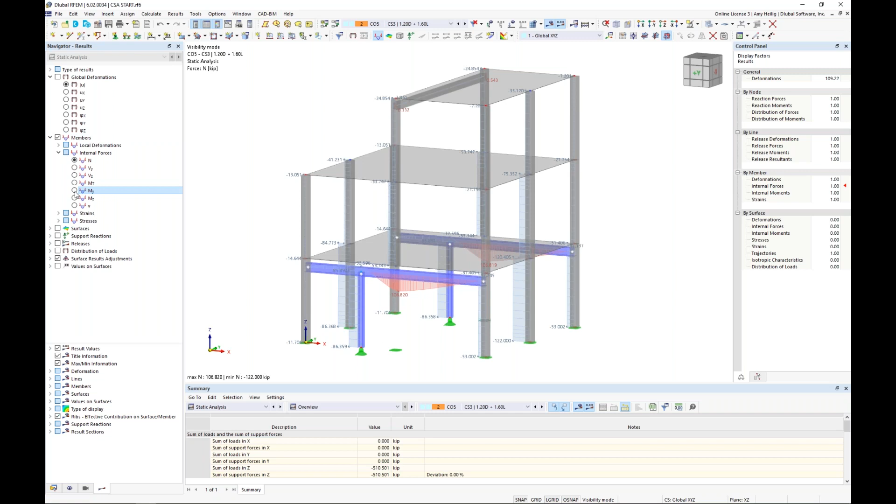We also can take a look at the member internal forces, for example the axial forces. Maybe we want to take a look at the bending moments here for our beam elements. So all of this is visible based on the various load combinations that have factored in these stages. And of course, we also have our surface results where we can view the bending moments, mx, my. We can view shear forces. This is obviously for my initial structure, stage number 1.

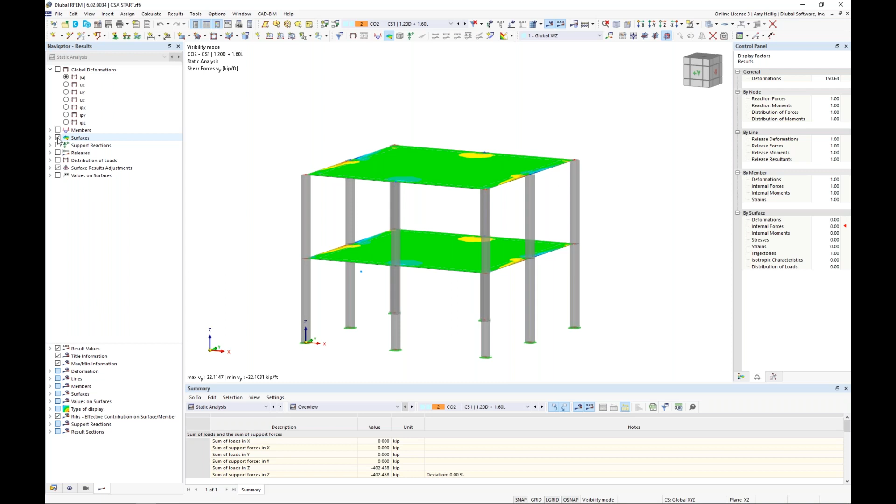That is essentially the analysis with these construction stages, but I would like to show you how to incorporate also the design with these stages as well. So we can activate the design add-ons by selecting it within my drop-down box here down in the table. We see here concrete design, and this is available because we activated the concrete design add-on within the base data at the beginning of the example. And you remember I stressed how important those design situations are because they are absolutely needed here when we move on to the design portion of our model.

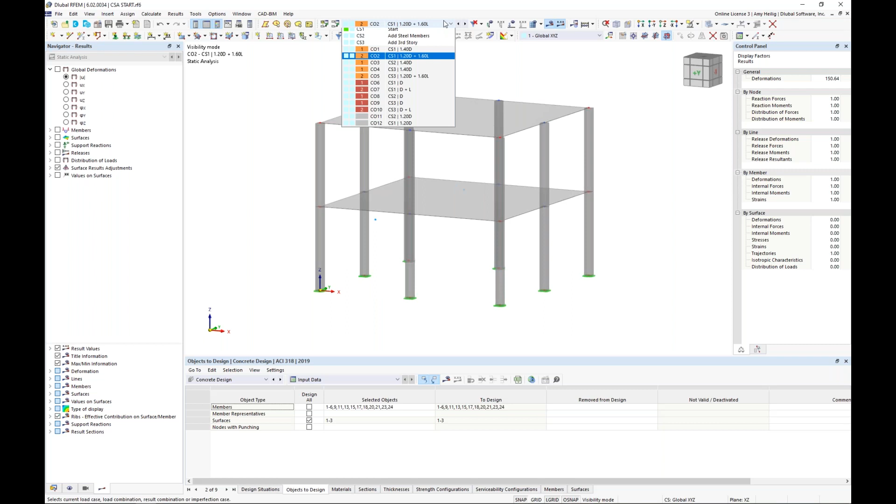So we have here our first LRFD design situation. We're going to select here from our drop-down to relate this to the strength design for the ACI standard. Then I have my unfactored load combinations where I'm going to relate this to the serviceability design. Under my second tab, I would select all of the objects that I would like to design, and I can select all of my concrete members, except for, remember, I'm not going to design this rib element here, and maybe I want to design all 3 surfaces. So that's what's currently selected here. I'm really ready to run my design as well, and I can choose this option here, show results.

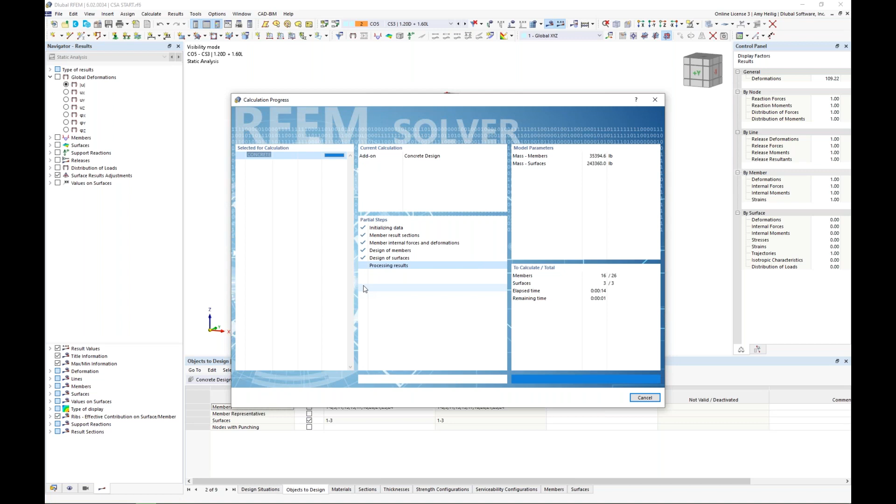Now I already have my internal forces from all of the load combinations. They're simply brought into this add-on, and the equations from the ACI are applied. We consider the reinforcement to ultimately get our design ratio and required reinforcement for each one of these surfaces as well as our members. So once we're done with the calculation, we can view the design ratios on the surface, currently in table format.

Notice at the bottom, we can view the design ratios by construction stage. Here's construction stage number 1, and we can view each one of these checks for this stage. Notice we have a pretty high check here for our shear design, so we'd probably want to address the shear design for this particular slab right around where this column element is framing in, but everything else for the most part looks okay.

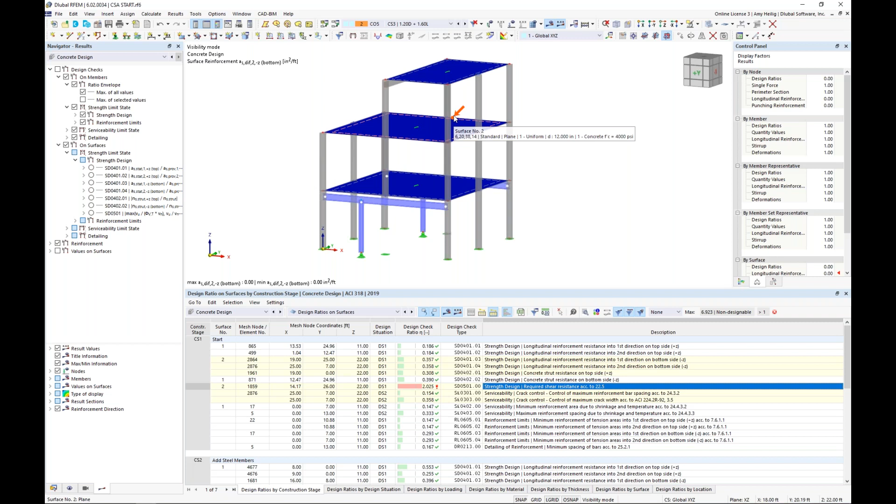We can also view the design ratios by the surface itself. You can see one of the columns here shows which construction stage this is applicable for, as well as the load combination. As we select any one of these options in table format, what's new within RFEM 6 is visiting the design check details.

The design check details give us all of our variables in table format, and on the right-hand side, all of our equations. This one is rather complex, but if we scroll down to the bottom, we're ultimately going to show how this design ratio is calculated step by step. We give you the code references in the right-hand column, as well as additional code references in table format, trying to be as transparent as possible about where all these calculations and code checks are coming from.

Notice here we have our drop down, and if we're looking at this particular location, mesh node number 2154, we can also select any one of the other construction stages if we'd like, and the program will automatically update our calculations to show for that particular construction stage.

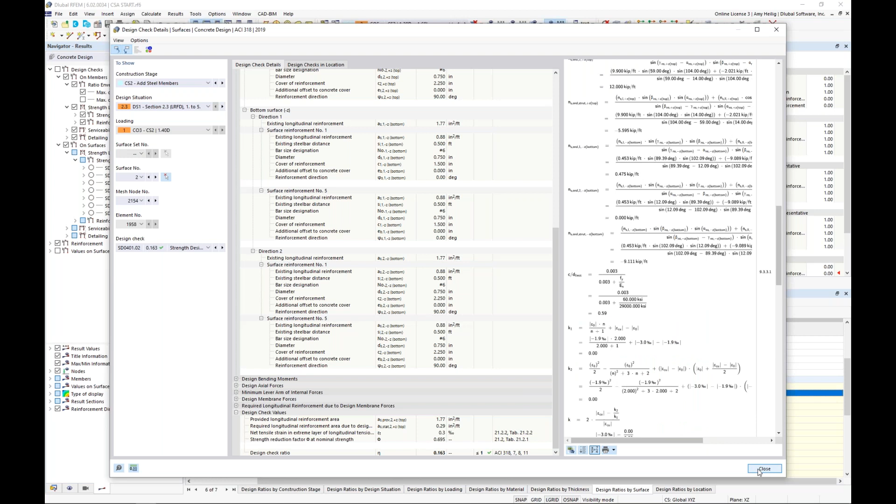Same concept here for our design ratios on our members as well. We can see design ratios by construction stage, and as we scroll through each one, we see all of the checks relevant to the ACI. We can also view, similar to the surfaces, the design check details. This one's a little more simplistic for our member design, but the code equations and code references are given.

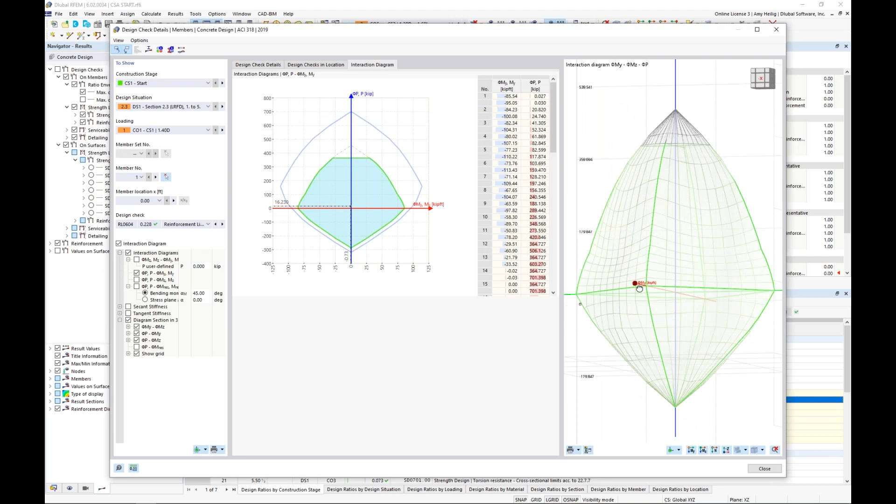Also new within RFEM 6, we have added the interaction diagrams for these concrete columns, so now we see the 3D interaction diagram here, and we can see exactly where we fall for this particular member.

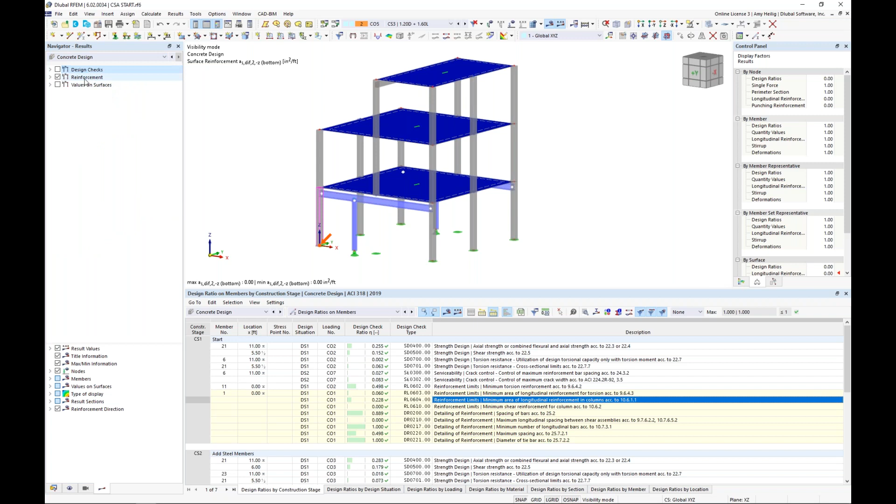Now we can export this information to Microsoft Excel, so table format is nice, but we can also view all of this information graphically over here on the left. We're no longer looking at the static analysis, but the concrete design. If we right click to collapse these folders, we can turn on the design check of our members, take a look at the strength limit states and the various checks shown here to graphically compare this to our color panel and see what exactly is happening for these members graphically as well.

That will sum up just a quick introduction to incorporating the construction stages for the concrete design add-on, but let's briefly touch on the steel design as well.

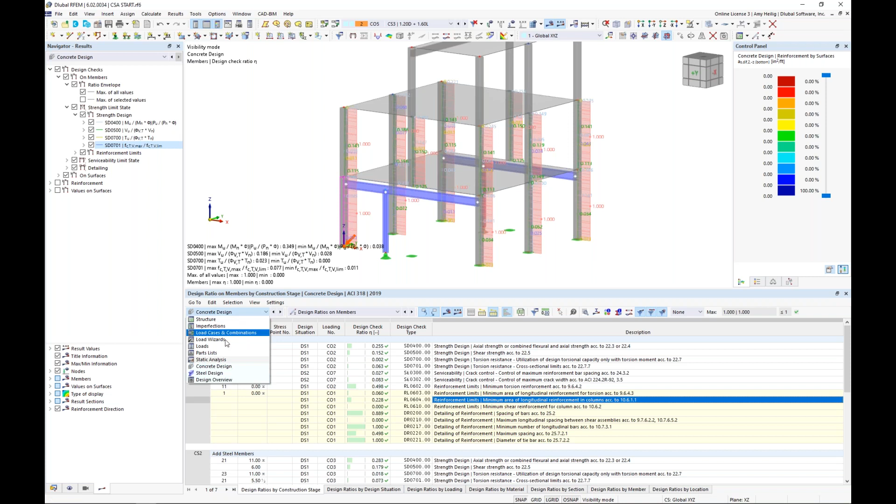Very similar workflow. You'll notice here under the steel design, we once again have our two design situations, LRFD and ASD, and we will relate this to the strength limit state for our factored load combinations and serviceability limit state for our deflection checks for the ASD design situation.

Under the objects to design, this is where I could graphically select all four of these steel members. I click OK, and I can run the quick calculation here. Again, I already have the internal forces, it just brings them into the steel design and applies the AISC equations to ultimately get the design ratios.

So we can view the design ratios by construction stage, and we see construction stage 1. We shouldn't have much available there because those steel members didn't exist yet, but for construction stage 2 and 3, we see all of the relevant checks shown here.

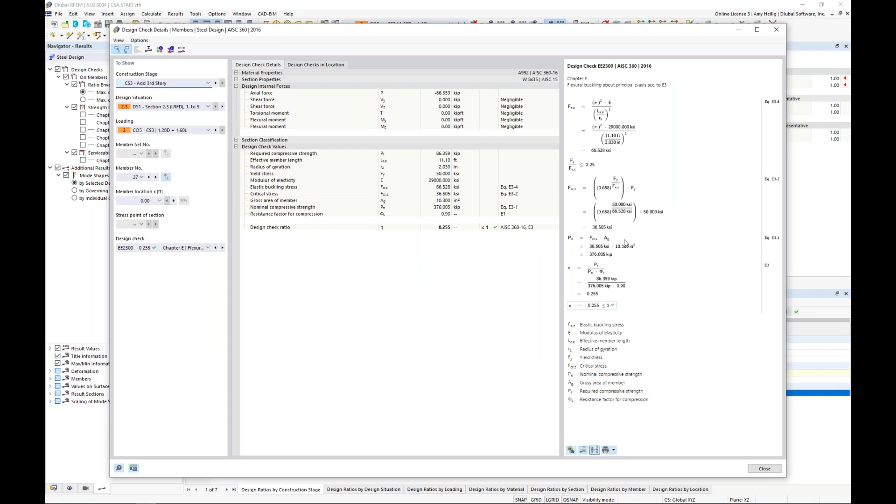Now you can also utilize the filter options, and if I don't want to see every single chapter for each member or construction stage, we can just filter to the max option. So now we see what's actually controlling for each construction stage. And very similar to concrete design, we can visit our design check details, and we see the code equations and code references directly from the AISC 360, along with all of our information presented in table format.

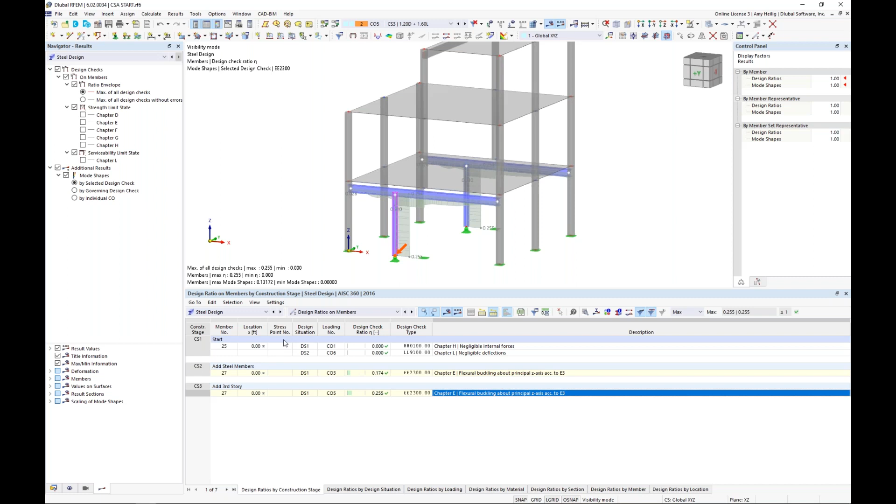So this will sum up the example today where we have modeled the entire structure. We created those construction stages not only for the model where we deactivated elements, activated other elements, but also the loading considerations where we need to factor in the construction stages to the load combinations and our design situations. Finally, we saw how we can incorporate those stages into the additional design add-ons. Keep in mind, it's not just specific to concrete and steel design, but we could incorporate this into our form finding add-on, aluminum design, timber design, and so on. So we'll go ahead and revisit the PowerPoint.

I did just want to touch on a few future developments that we can expect with our construction stages analysis. We recently added in RFEM 6, which we already had in RFEM 5 - it just took a little while to get them into our new version - line, surface, and nodal releases. These will eventually be added to the construction stages analysis consideration. Remember, all of those options to turn on or off for activation or deactivation, we'll add in these elements as well. I had already mentioned the stage analysis via load cases and results combinations utilizing linear superposition.

This will be extremely helpful for large models with many load combinations, rather than having to factor in these construction stages for each load combination. We can superimpose the results on the final structure to consider the stages. So this will be really helpful for just improved performance.

We also will be adding what we call phased massive cross sections and surface thicknesses, so we'll be able to activate the element parts step by step. For example, if we would like to increase the dimensions of a concrete column, we'll be able to take into account those phase activations within the construction stages add-on.